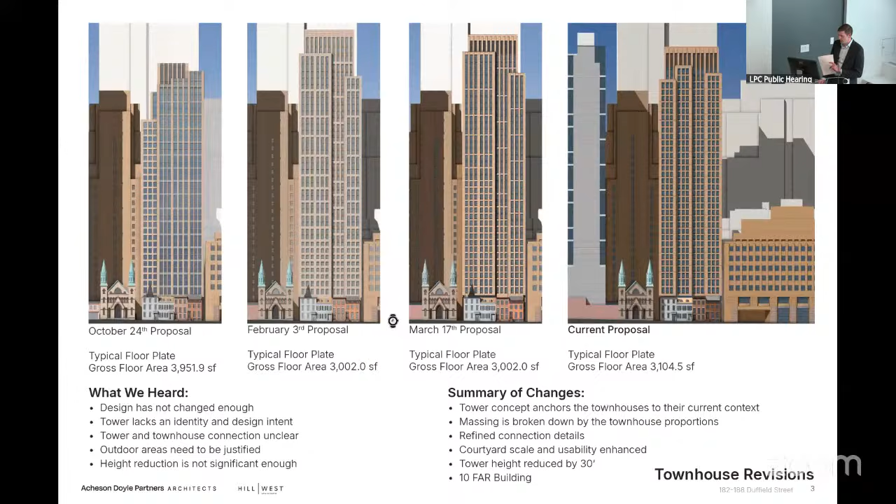We'll show you that. Overall, the height of the building has been reduced by 30 feet. And just to reiterate, this is a 10 FAR building, where one of the previous iterations was a 12 FAR building.

Okay, so design narrative. We want to take you back to these houses and what they mean and how they came to this site. These are the 4 townhouses at their original location on Johnson Street.

They represent middle-class residential architecture in downtown Brooklyn. Downtown Brooklyn has mansions in Brooklyn Heights, not too far away. There was workers' housing in the Brooklyn Navy Yard, not too far away. But these buildings represent middle-class residential architecture specifically, and that is why they were preserved and became individual landmarks. When they were built here, they were part of a group of buildings that were primarily 3 stories tall. That was their context. They were very much in context with their surroundings.

They were moved in 1990 to make way for the Metrotech development, and they went to a very different context. The buildings you see on the right-hand side and in the back were there in 1990 when these buildings were moved. So there were tall masonry buildings to the right-hand side and to the rear of these buildings from day one when they were moved to this site. They were put on modern foundations, so the townhouses exist above grade, but below grade is a modern foundation. This is the context they were put in when they became individual landmarks in 2001.

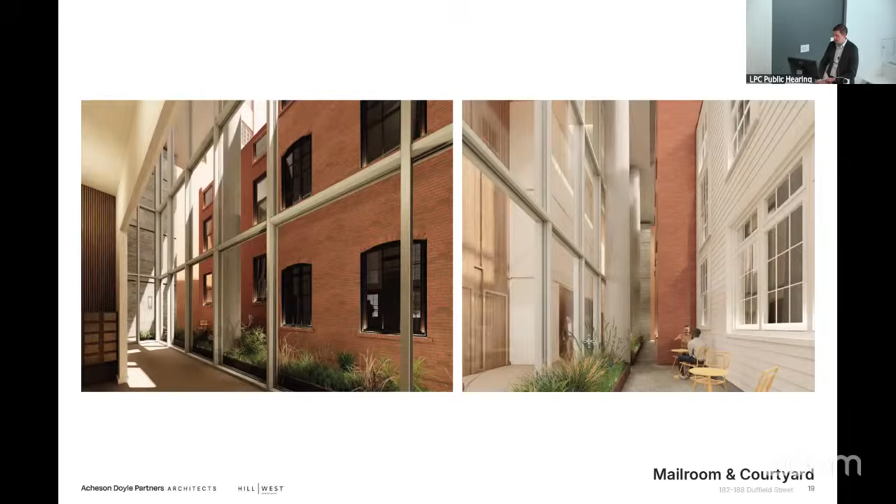This is the courtyard turning the corner and going into the rear yard. This is also our service entry, so the space will be used both for service and for recreation. And then the rear yard of the building is landscaped, and that connection between the courtyard and the rear yard makes it a much more usable, functional space.

Okay. So the townhouses - we looked at them again and how they connect to the new tower design.

And when they were moved to this site, they all have something slightly different to them. 188 on the left used to match 186. It was originally built to be the exact same twin townhouses.

In the 1880s, it was remodeled in a Queen Anne style. It's just a nugget of information that all of these buildings have a little bit of history that are a little bit quirky in one way or another, and all tell that story of residential architecture in downtown Brooklyn.

As you go down the row, 184 has a double parlor, which is a unique configuration. And 182 on the far right-hand side is a Greek Revival, very charming townhouse with small windows at the top.

The interesting thing about these buildings is they all have a history to tell, but as a composition, they're roughly the same width as you walk down the block, but they present themselves as 3 stories and 2 stories and 3 stories and 2 stories. And we feel that variation really gives the composition of these townhouses interest, and it's something that we wanted to incorporate into the new building design.

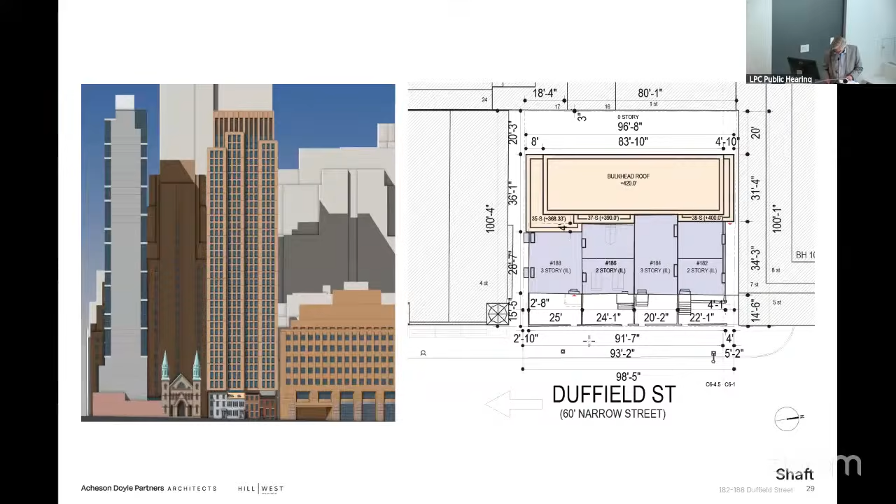Here you see how this compares to the prior iteration. The three-story packaging on the southernmost bay wraps the corner. It is clearly visible, yet subtle. The elimination of the multi-story windows makes this a gentler, more sophisticated architecture with less vertical emphasis. Note how the townhouses clearly stand in front. They hold the streetscape while the tower acts as a backdrop, reminiscent of the existing lot line walls that presently surround the site.

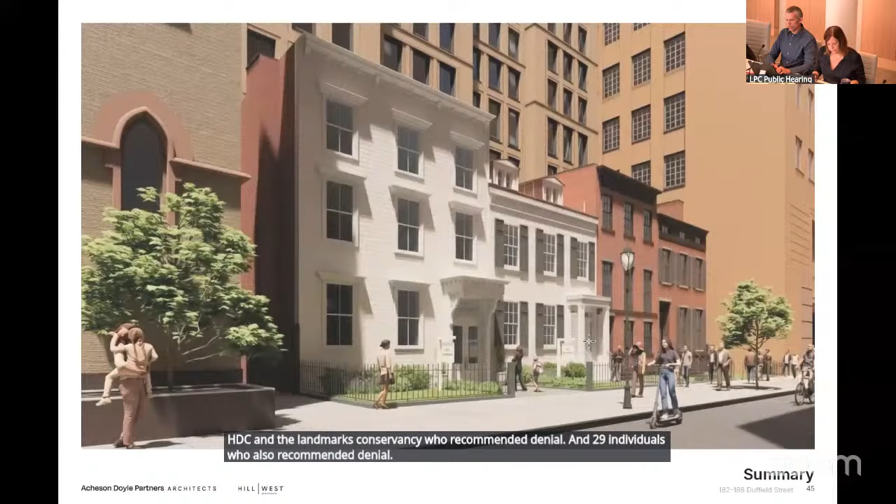So, commissioners, before we start the discussion, I want to say a few words. This is a proposal that raises a lot of unique issues. In 1990, as part of the MetroTech Urban Renewal Plan, these 4 buildings were moved to their current location and went from having a residential context to a non-residential context. The designation report describes them as examples of middle-class housing, but today they are in a very different context amidst the large commercial buildings of the MetroTech development and new residential towers, and to the rear is the individual landmark 1930s skyscraper.

That history of being moved and the resulting atypical siting and context potentially allows for a different approach here than at other sites. In this proposal, 3 of the buildings are preserved in their entirety, and 1 is being rebuilt behind the front and side facades and incorporated into the tower behind, so the issue here is primarily related to the proposed tower in the rear. As we know, there's not one approach to appropriateness — there are a range of designs that could be appropriate. I believe the key issues are the proximity of the new building to the landmark, the volumetric relationship to the landmark and the site, and the aesthetic connection of the lower portion of the building and how that is experienced in connection with the landmark. I think our approach to cantilevers is analogous to this situation. The question is, what do you see in connection with the designated property?

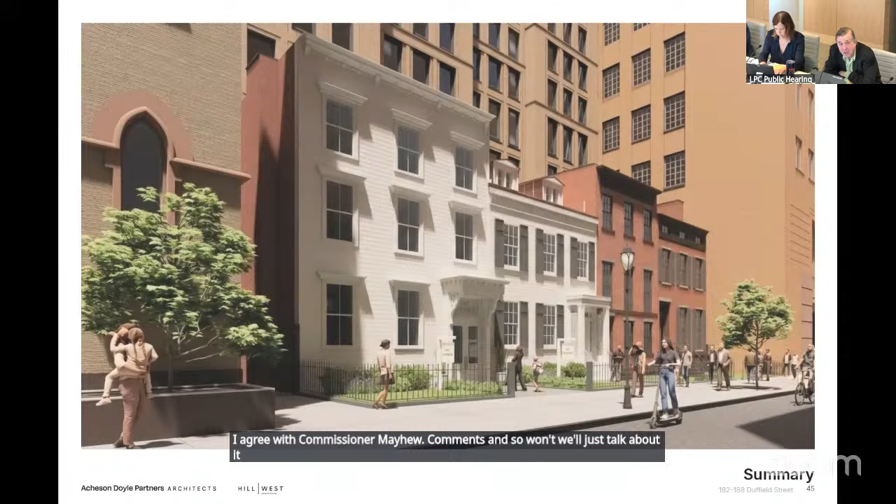Well, I agree with Commissioner Mayhew's comments, so I'll just talk about a few things. This is always, because of the relocated buildings, been a very strange location, where you always had a tall building as a backdrop. So the question is, with the change, is the backdrop going to really affect the historic buildings and how we perceive them? And I think in general, no, I think the changes in the facade have definitely improved it.

I think the creation of a courtyard or alley behind three of the buildings is significantly better. And then the fourth building being incorporated into the lobby is then perceived within the lobby without the connector piece, which I also think is better.

My one comment working with staff is, I realize you need the fire rated glass, but anything that can be done to reduce the frame, looking at potentially a different color instead of, I think it's silver now, or if there are any manufacturers who can make a smaller frame. But I realize given the size of it, you need that, and you probably need a fairly beefy structure to make it work. But again, I can find this appropriate, and I agree with Commissioner Mayhew.

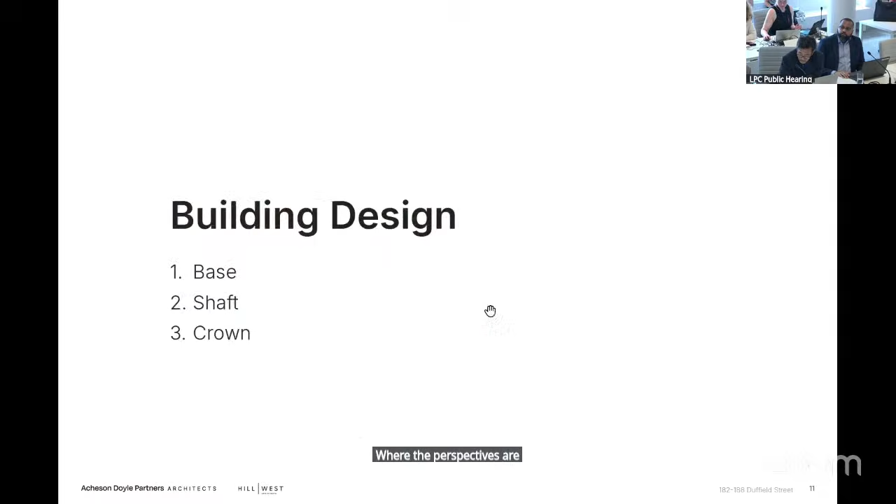There's a way that they could have taken the lobby. If you could go back, can we put the image of the section? Page 12, perhaps. Can we change the image? Go back one, where the perspectives are. Go back, so this is what we're going to see.

So there's a wall that's but three stories high on a space that's 10 feet. It'd be very exciting. I can imagine that, but I can also imagine a way that the lobby and that space could, for the tenants, for the people living there, be a really exciting kind of thing, instead of having this vertical wall. The wall could be shifting slightly so that you have a feeling that they're all part of one, not demarked by a wall. And I think if that was to happen, if that was the play of that, it's not an alleyway of blocks, I could feel more comfortable about it.

Okay, thank you, Commissioner.

Commissioner Chu, you commented that it was important that the historic houses retain their low-rise sense of scale at street level and that they were being maintained. You thought the new buildings set behind the houses felt like a backdrop along with the surrounding context, but you had a number of design comments on the tower and thought it lacked identity, and wanted to see more about how the scale of the tower related to the larger surroundings.

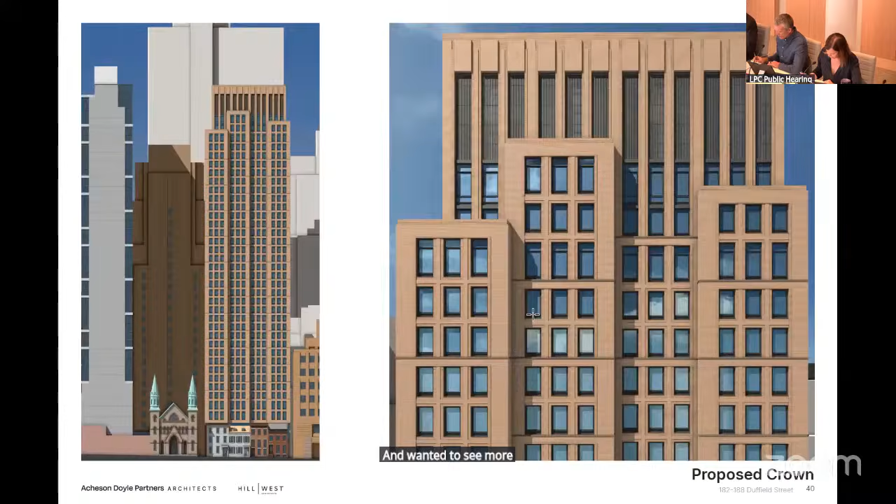Okay, thank you. I think that a lot of the discussion that has been had by my fellow commissioners is very, I feel, consistent in my reading of this proposal with this discussion.

As I look at it and I assess this proposal, it's really about its relation to the designated landmark and to some extent the context, but first about the houses themselves. I do appreciate the many revisions that have brought back essentially what was just a facade to an entire house structure and volume, and in fact the floor plates for 182, 184, and 186 are retained, as well as the structure and facades. So in terms of the amount of fabric that is being kept in the current proposal, I'm very much in favor of it.

I also will echo Commissioner Master's comment about the relationship to the streetscape. And when I look at this, I'm trying to gauge the change in effect to the landmark houses and the experience one has as you walk down Duffield Street and see these houses in their context. I think it was the right decision to not move them forward, to keep that space in front of the houses to the street and have the sidewalk more of a gracious setback for the houses. To that extent, I also looked at the images that were provided on Duffield, which I hadn't seen before, which are very helpful to look at.

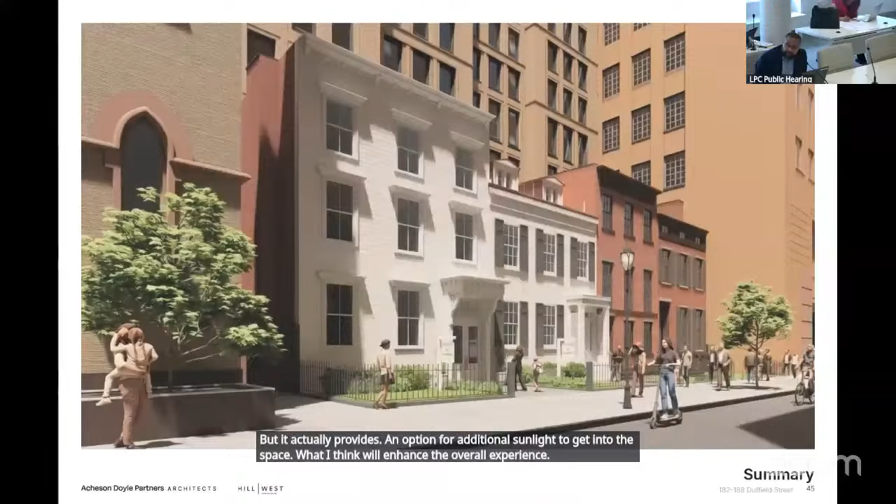As for the tower, I'm fine with a tower in that location. As I already stated, if you look at the surrounding area, you can already see the assortment of vertical structures in the area. And as was also pointed out, some of these structures were present before the moving of these landmarks.

The landmarks themselves have gone through an enormous amount of change. And because of that, I believe what is being proposed is not too intrusive to the existing landmarks. I'm glad to see that the landmarks will be able to be revived and gain as much luster as they possibly can. I'm saying this because the site itself is very difficult, and the position the landmarks were placed in makes it a very difficult proposition no matter what you do. So again, I'd like to thank the applicant for their tenacity in actually trying to bring a plausible solution.

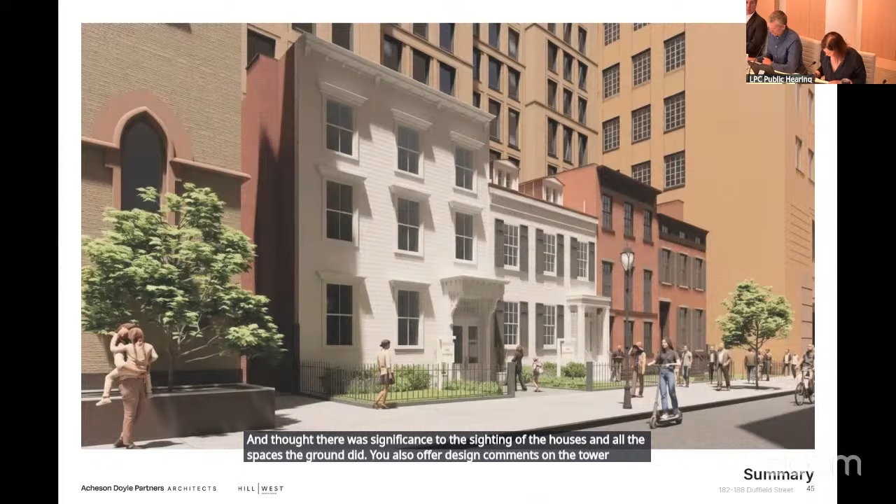Last time you stated that you were back to being troubled by the concept of having a new building in the rear yard of the individual landmark houses, and thought there was significance to the siting of the houses and all the spaces around it. You also offered design comments on the tower design, the sheer walls at the base, and the lobby courtyard. Thank you.

I guess I remain in that same situation. I think that the project as shown is an improvement, and I think it achieved what it sets out to achieve and is successful given the parameters they have set for themselves. And I understand Drew's argument and hear it. So I don't really feel that the project as presented is unsuccessful in achieving its goals.

I'm more concerned about the conceptual underpinnings of the application. I totally accept Frank's reading of the uniqueness of the site, which Drew echoed, or vice versa.

What it implies is that because the buildings were relocated, their status is somehow debased. They were original and historic and legitimate and real, and because they're moved, that Williamsburgization of them, or Disneyfication of them, into an assembled ersatz collection gives them perhaps less significance, value than they would have had they been located in their original location.

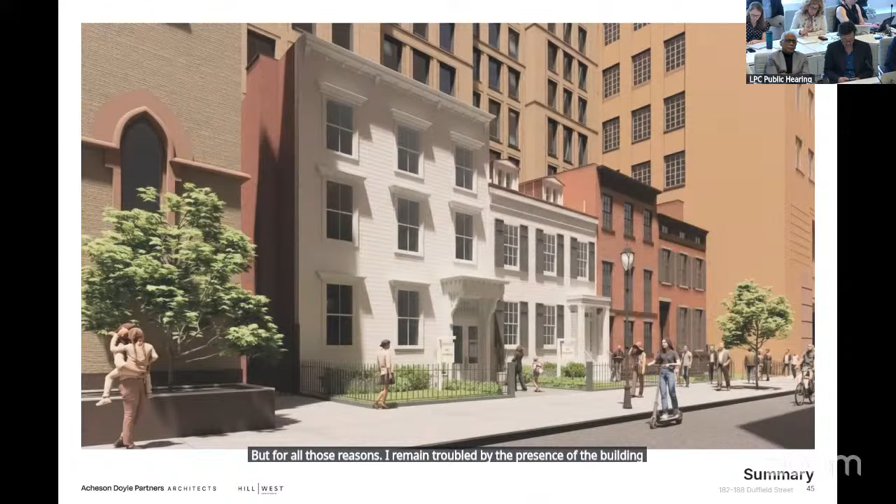I think one thing that I would say is that this project finds itself at the nexus of two different regulatory systems, landmarks and zoning. I think if we could wave a wand and disregard zoning, this building would be much more appropriate if it were a lot line building pushed to the back, as the Belltel Lofts is a lot line building pushed to the back. It would create more space for our building, give a real rear yard to our buildings, and would be a much more contextual approach to the neighborhood's development in that immediate context.

But that's just not—I don't have that wand. We don't have that wand to wave. So I am troubled by this, and as we saw, the applicant showed a precedent; this will become a precedent for other projects. So I think that it argues for bigger policy issues.

I mean, I think one way you could solve the issue of debased quality, or allowing for more flexibility, would be to have grades or some kind of indication within a designation that this is less significant for this reason, and therefore less deserving of protection. But that's not how it works today. So I can't support it as is.

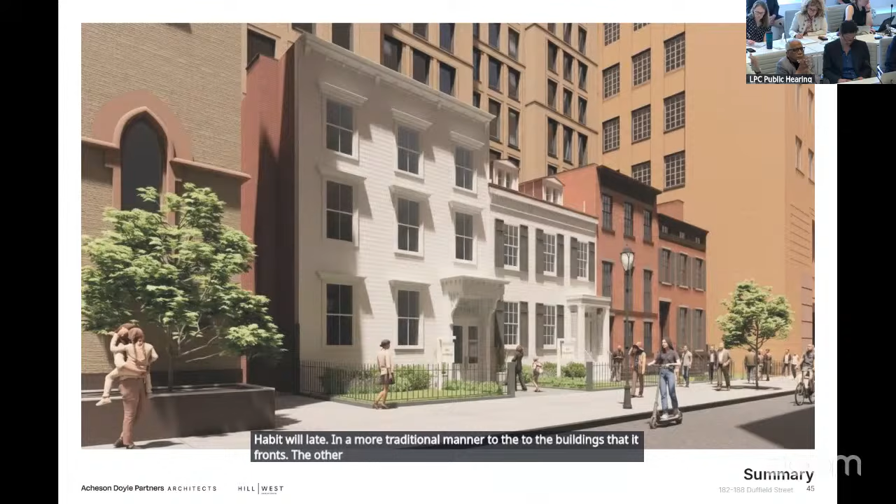The other issue is the ceiling. That cantilever is rather perfunctorily detailed. It's a concrete slab that, looking up at it, it's not a courtyard. It's not even an alley. It's got a roof. So by zoning and by experience, it's not that.

And I think there are lots of examples of overhangs that have a kind of intentional relationship with the space below, whether it's a vault or a material choice or beams. There's something kind of unconsidered, I think, about that transition from the vertical plane to the horizontal plane as a three-dimensional experience at the back of those buildings that could be improved.

Okay, thank you very much for your comments.

Okay, just one second.

Okay, I believe that we have the votes to make a motion, but that we're going to recommend that the applicant continue to work with staff on the details of the curtain wall. Commissioner Mahan, will you make that motion?

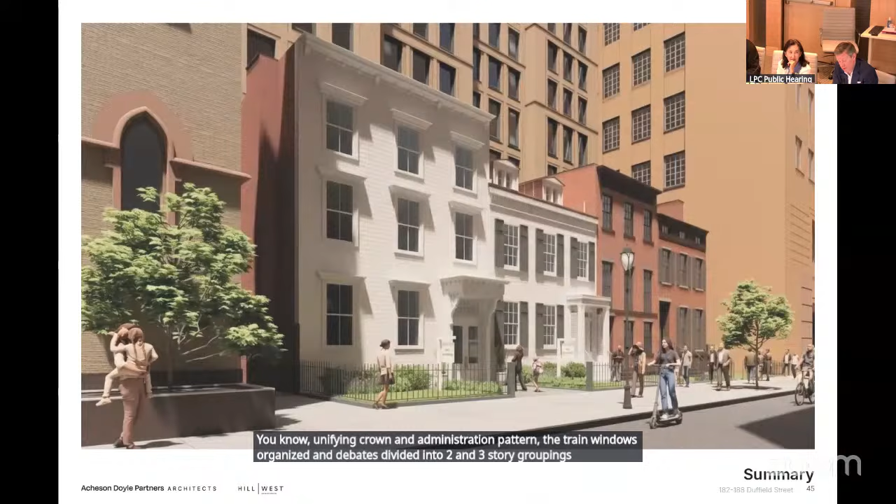That the four-part vertical massing and plane changes of the new building behind each townhouse, culminating in a unifying crown and a fenestration pattern featuring windows organized into bays divided into 2- and 3-story groupings by horizontal cast stone bands, will relate well to the facade widths, heights, and fenestration of the individual townhouses below.

That the incorporation of short recessed louvers with a dark gray finish at the bottom of each window will facilitate integration of energy-efficient mechanical systems, will match the finish of the windows, and will be partially concealed from view by the brick sills and cast stone banding, thereby minimizing their appearance from the public thoroughfare.

That their realignment and elimination of select floor levels and rear facade reconstruction at 188 will not affect the exterior fenestration or be conspicuous as seen through the openings.

That the excavation and structural work will be designed and built in compliance with Department of Buildings regulations under the supervision of a licensed professional engineer to protect the buildings, and will continue to undergo enhanced engineering review, and that the proposed alterations and construction of a tower will enable this long vacant or underutilized group of buildings to be restored and transformed to a new residential use, thereby supporting the special architectural and historic character of the individual landmark.

And that the applicant will work with landmark staff to refine the details of the fire-rated glass curtain wall at the lobby of the new building.

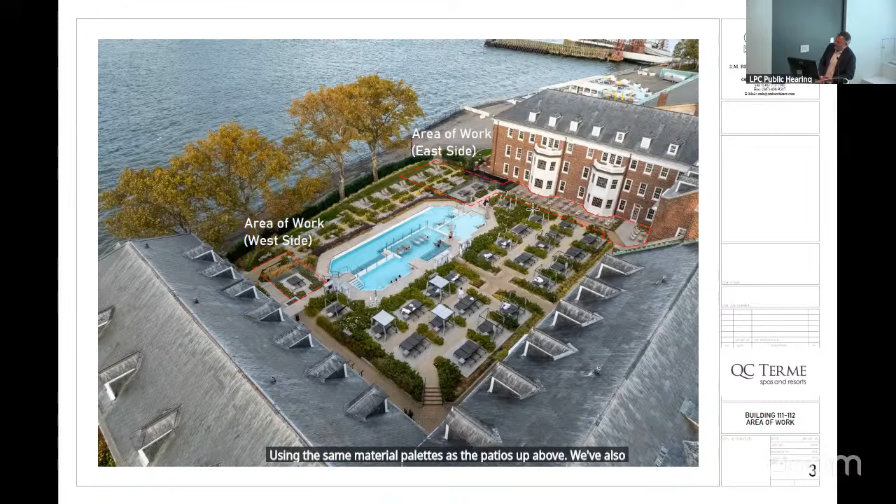In response, we are still showing the Trex decking along the side of the east building, and we've modified the proposal to introduce patios on both the east and west side, using the same material palettes as the patios above. We've also added more details on the existing conditions, since there were questions about that.

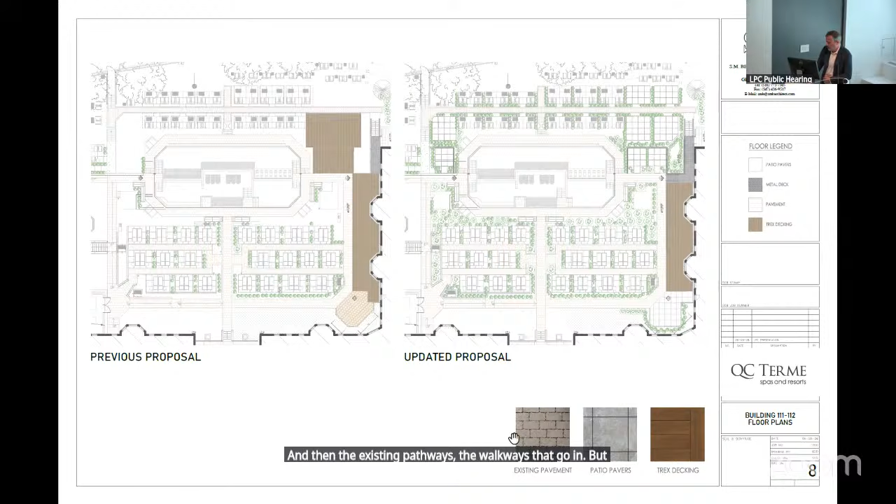Each of those has the patio underneath, so that's consistent use of materials there. The existing pathways, the walkways that go in between, are this sort of brownish brick. We're not adding any of that as part of this, but it is part of the palette. So the only new material being added in the plan here is the Trex decking along the side, which I believe the commissioners were comfortable with last time.

The upper patios, both east and west, have the glass railing. The lower patios have no railings. Again, both use the same paving material that is used throughout the complex.

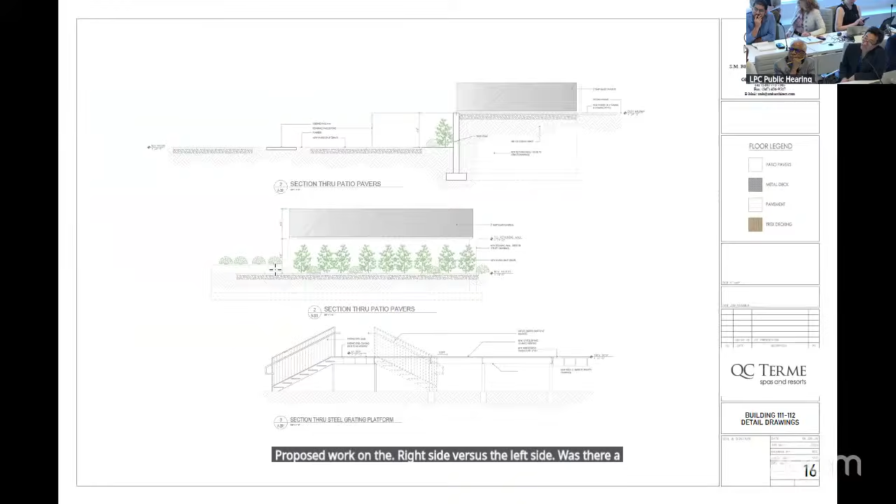Thank you. Commissioner Goldblum: Yeah, thanks. So looking at the proposed work on the right side versus the left side, was there a reason why you didn't just make it symmetrical to what's already on the one side? I mean, clearly there's an extra array of pavers and a wider balcony and a different position for the walkway. Was there any reason for that versus just making it symmetrical?

Yeah, so I think as noted, obviously this is a very symmetrical arrangement, but it's not completely symmetrical. You notice there are some differing conditions on the left side versus the right side, having to do with grade changes and the like. And we'll note that from the public walkway, which would be the area to the top over here, these platforms are largely obscured by bushes and greenery. So the symmetry that you're seeing is really not experienced from the outside, but from the inside.

Sandy, do you want to talk about rationale behind the arrangement particularly? Yeah, the overall site is symmetrical in the fact that the pool sits in the center. We were looking for a balanced condition from the left and the right side, or the east and the west. We're also dealing with some unfortunate site conditions. Underneath, there's some tunnels, air shafts that come up on the left side that are not existent on the right side. The other condition we were dealing with is an existing pathway, sort of an egress pathway. So the intent was to give you the balance to the left and right of the pool, but there is some asymmetry to it.

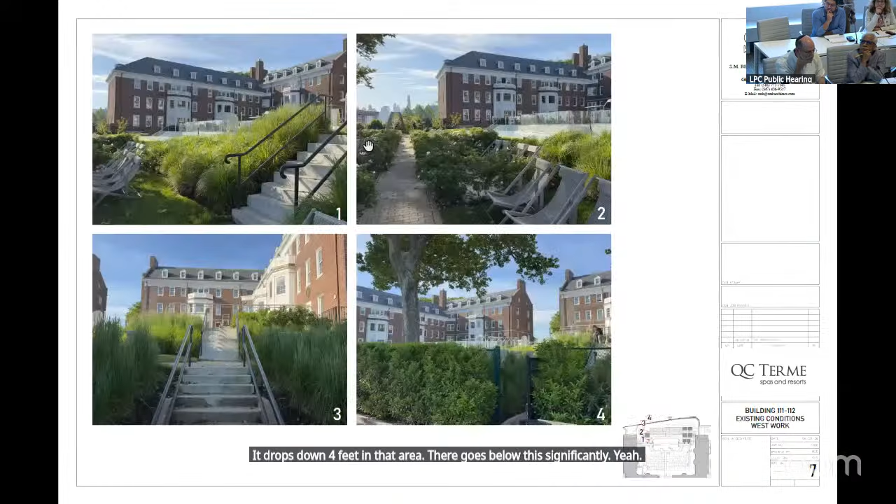There's some air intake where the bay windows are. It drops down 4 feet in that area. Grade goes below this significantly. How do I go to the section? Go the other way. So we're dealing with the grade down below, and in there are field drains, air intake, relief valves, all of the mechanical from the basement of building 111.

Okay, so that being a green zone, which would have made it more symmetrical, would have been challenged because of that. I'm not sure if I... If you look at the footprint, this desired to be a green zone because it was up against the facade, and typically all the facade had green planting up. The existing condition had the green zone, correct? Okay, I understand what you're dealing with.

Well, the technicality is that the drop is 4 feet, elevation 17 to elevation 13. And the choice where we landed on the glass guardrail was consistent with the pool. The pool has also some steps, so we were going with a consistent glass detail.

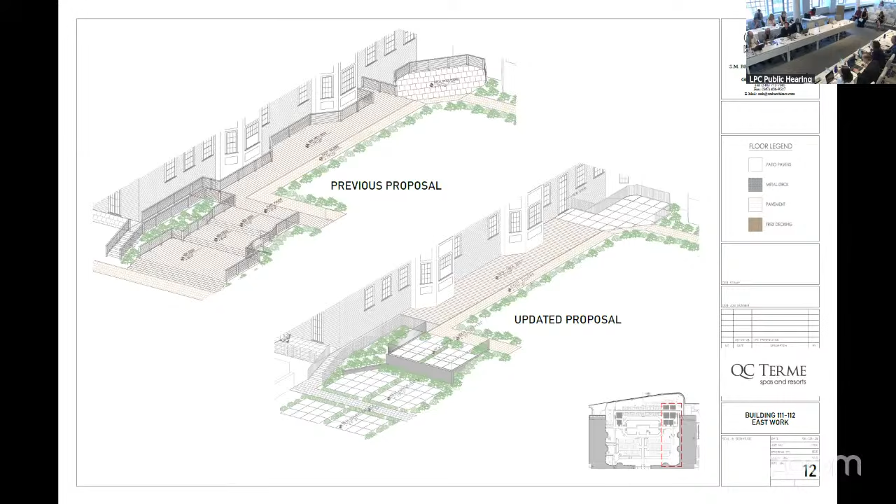Okay. Right. Point just being the asymmetrical aspect is actually really only seen because of the glass guardrail. Everything else is pretty much on the floor plan, and it's hard to perceive so much that there's a difference. Any other questions? No?

Okay, commissioners, since we last heard about this at the hearing in January, I wanted to summarize the commissioners' comments. There was a general thought that the presentation materials were lacking and unclear, but most thought the proposal was consistent with the conditions of the existing courtyard and supported the new decking and door to the side of the courtyard. Some had concerns about the work introducing asymmetry into the courtyard landscape. Now the presentation materials have been updated and clarified, and the proposal has been changed to forego the stepped wood decking at the lower courtyard for more typical pavers used throughout the existing courtyard.

And Vice Chair Master, would you start this conversation? Sure. I think the changes you made are a big improvement. I understand you can't achieve perfect symmetry, but it's a big improvement over what it was before. It's much more symmetrical. You're introducing more pavers and less decking material, which also introduces some more greenery. So I can find this appropriate.

Commissioner Ginsburg? I agree, I can find this appropriate. Find it appropriate as well. Commissioner Chu? Yes, I can find this appropriate. Commissioner Jefferson? Appropriate. Commissioner Mahan? I concur. Okay.

That's been approved. Let's move to the next item. Next item is public meeting item number 3, LPC 26-06324, an application for a certificate of appropriateness in the Borough of Manhattan, Block 1184, Lot 1, 3 Riverside Drive, the Kleeberg Residence Individual Landmark, also in the West End Collegiate Historic District Extension. This is a French Renaissance Revival style townhouse designed by CPH Gilbert and built in 1896-98. The application is to construct a rooftop addition, alter the areaway, and replace windows.

This was last presented at the public hearing of April 7th, 2026. No action was taken at that time. The applicant will present revisions to the proposal in response to your comments after we open the proceedings.

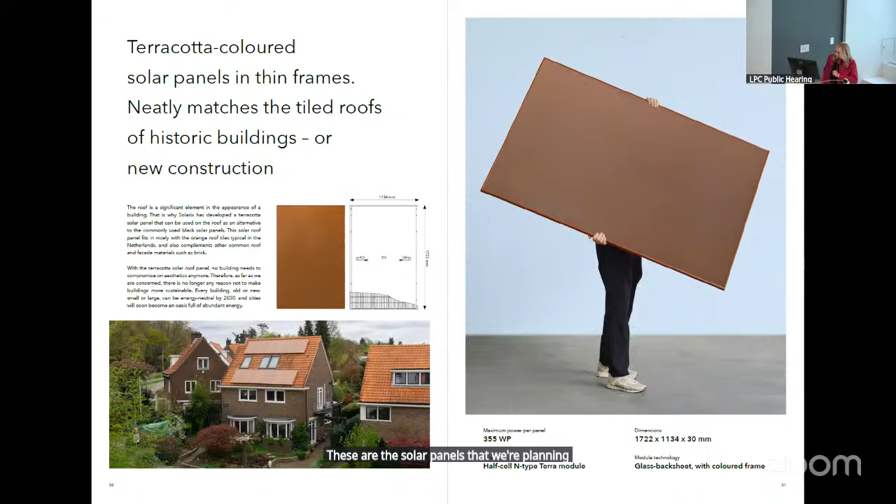We do have an attestation from the elevator company because it was discussed at the last meeting as to why this elevator needs to be at this height. We cannot use a hydraulic elevator; this is an MRL, machine roomless elevator, and this is the lowest height we can have for this elevator. There is a letter from our elevator vendor in the appendix stating as such. We worked with several elevator companies to bid the elevator, so we know this is the shortest elevator we can get that will be ADA compliant and also able to take a stretcher.

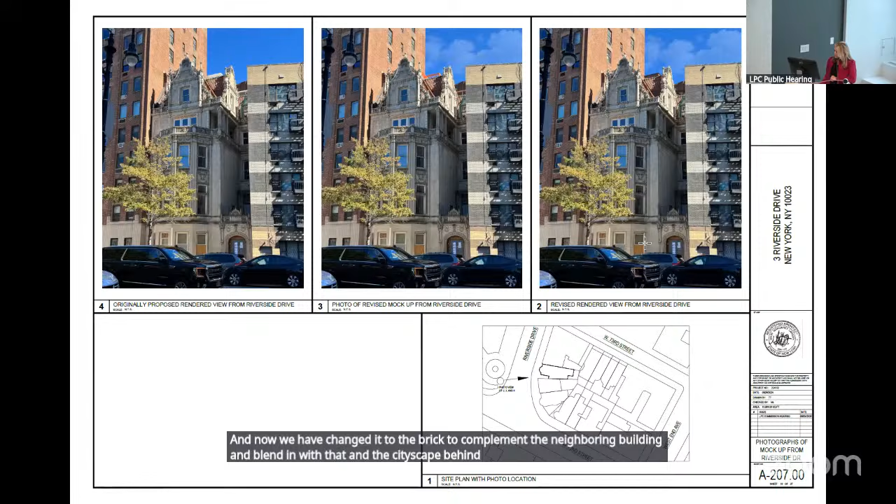This is the view from further out, as you drive up toward the West Side Highway. You can see we are trying to match the neighboring brick buildings and their copings, blending our rooftop addition with the cityscape that has developed around this building over time.

As this slide shows, we have blended, using different materials, our rooftop addition to make it more cohesive with the coloration of the building, our terracotta roof tiles, and the buildings that have grown up around us, so that our addition does blend in with the context of what has happened around this building over time.

Commissioners, are there any questions?

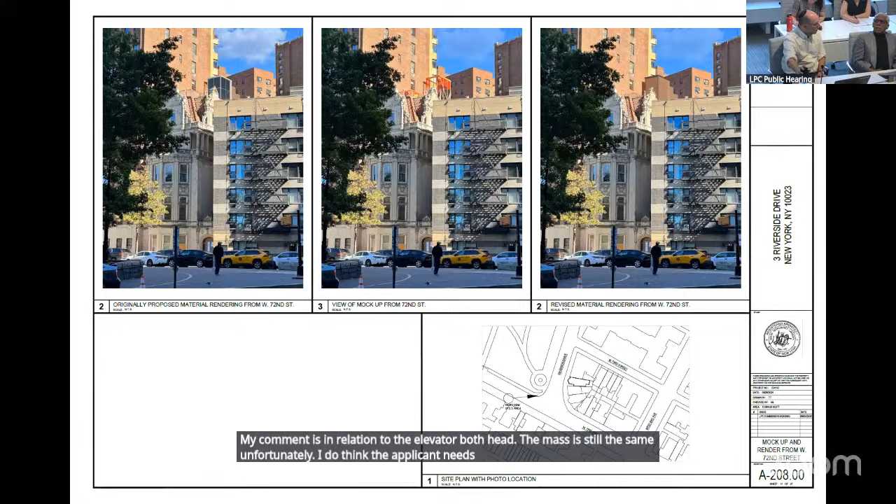Yeah, I think that there have been some improvements to this proposal. My comment is in relation to the elevator bulkhead. The mass is still the same, unfortunately. I do think the applicant needs to work with staff. The details are not here. It's brick, but these panels, are they just attached to the brick? I do think that it should be carefully detailed, even though it's a backdrop. The historic building is so well crafted. Anything that's added to this should have some level of care. So otherwise, it's appropriate. Thank you.

Commissioner Jefferson? I think they have responded affirmatively, and I think the elevator penthouse, it works, the color blends in somewhat. So I can approve that.

Thank you. Commissioner Goldblum? Thanks. Yeah, I think it's greatly improved. The areaway, great. Rear facade, curved glass, fantastic. The change in the bulkhead is an improvement. I think I kind of agree with what Stephen was saying about looking at the details of that bulkhead, though. I think that the south-facing panels are okay for me in their new color. Although I would suggest that the applicant work with staff to look at the details as Stephen had suggested, maybe they can be recessed in new construction. Maybe you could recess them in so there wouldn't be a shadow from them into the construction of the bulkhead.

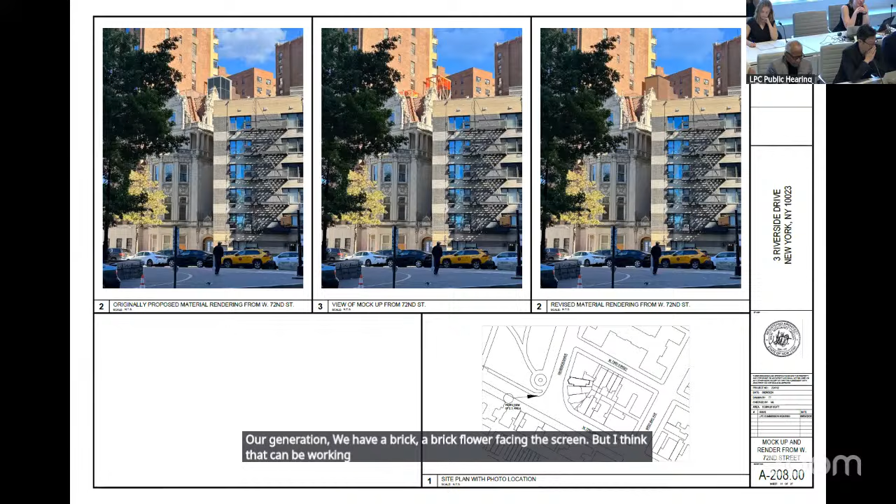Okay, thank you. Commissioner Mahan? I generally agree with Commissioner Goldblum. I think there's a lot of improvements here. I think the changing of the coloration of the bulkhead to match the sort of context buildings is a significant improvement. I do not think that the solar panels will blend as well as illustrated in the rendering here. I think they'll look quite distinct and discordant with the context. I think the ones facing west should definitely be removed, and the ones facing south should be considered together with staff. Perhaps recessing them could be a compromise position as proposed by Commissioner Goldblum.

Vice Chair Master? Yeah, I think that this is a big improvement. I think they can work on the details with staff. I'm happy for them to consider the suggestion that Commissioner Goldblum proposed, but I'm also okay with the solar panels. But perhaps they can work with staff on that.

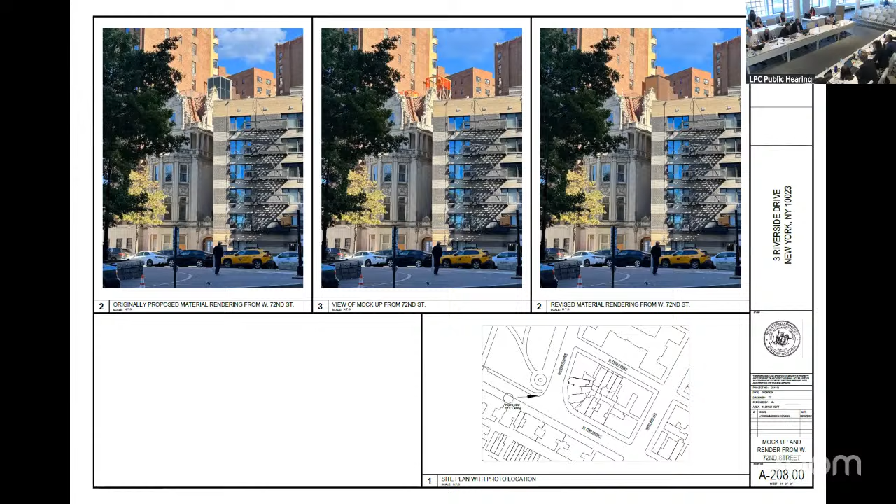Okay, I think we have a vote with a recommendation that the applicant work with staff to explore the details of the elevator bulkhead and the placement and detailing of the solar panels. Oh, and Commissioner Ginsburg, if you could make the motion, sorry. Figured that, but thank you.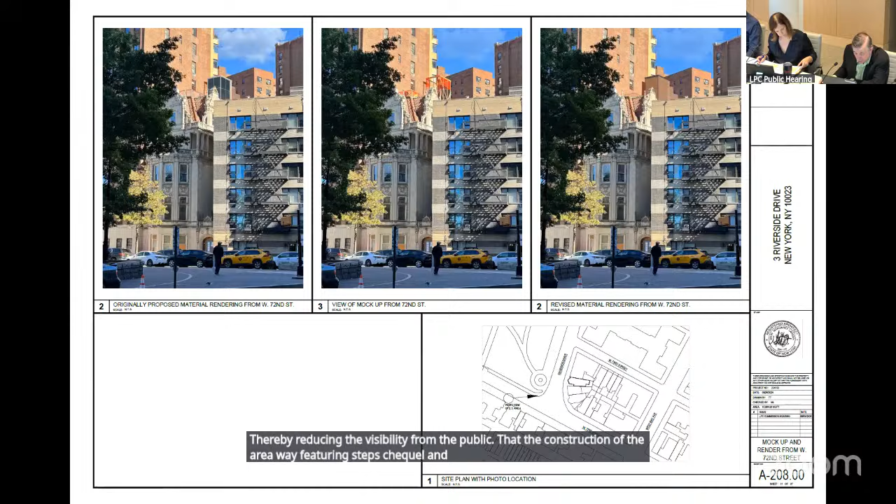That the proposed material and finish of the rooftop accretion, consisting of red brick cladding at the elevator bulkhead, reddish-brown solar panels, terracotta colored HVAC screening, and brown pergola, will visually blend into the red brick masonry of the secondary facade of the taller building in the background. That the proposed metal picket railing at the roof will be simple in design, neutral in finish, and will be set back from the parapet, thereby reducing the visibility from the public thoroughfare. That the construction of the areaway, featuring steps, cheek wall, and newel posts with a larger footprint than the missing original areaway, will return the ground floor of the Riverside Drive facade closer to its historic condition, and the design of the areaway and use of limestone will be in keeping with the character and materiality of the original with variations to accommodate modern code and accessibility. Working with staff, the details of the elevator bulkhead and locations of the solar panels should be refined.

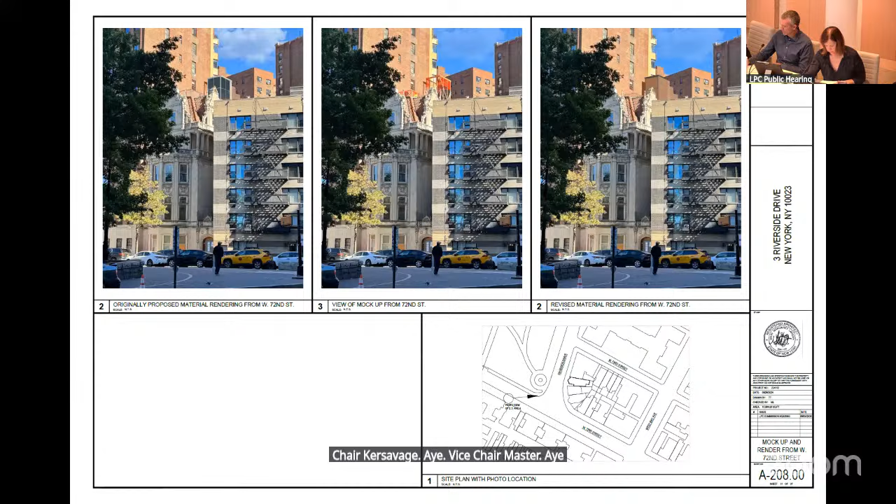Let's move to the next item. Next item is public meeting item number 4, LPC 26-05940, an application for a certificate of appropriateness in the Borough of Manhattan, Block 1210, Lot 152, 144 West 80th Street in the Upper West Side, Central Park West Historic District. This is a Renaissance Revival style row house designed by Gilbert A. Schellinger and built in 1890 to 91. The application is to construct rear yard and rooftop additions. This was last presented at the public hearing of March 10th, 2026. No action was taken at that time. The staff will present revisions to the proposal after we open the proceedings.

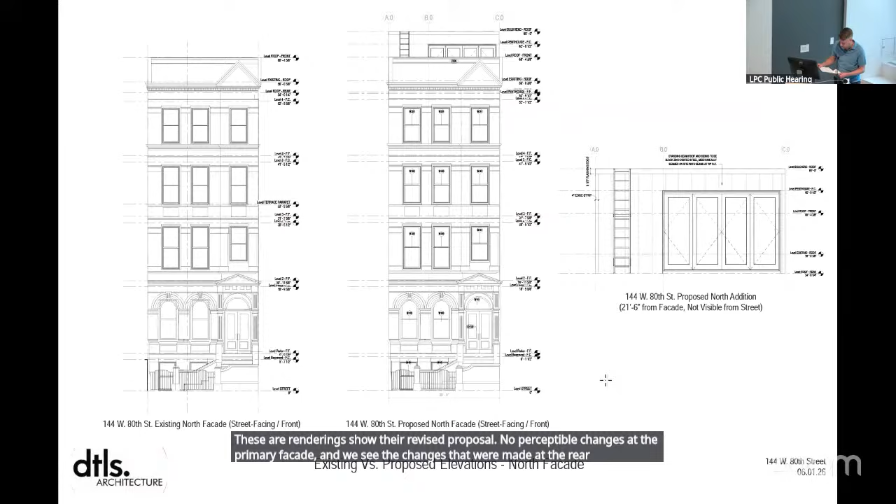These renderings show the revised proposal, with no perceptible changes at the primary facade, and we see the changes made at the rear. Elevations showing the primary and the rear with those changes that we discussed. At the retained top floor, the stucco cladding will be removed to expose the underlying brickwork and stone lintels at the masonry openings. Note also that the brick detail will be restored at the cornice to match the conditions at the row, as we see in comparison with the neighboring house at 142 West 80th Street.

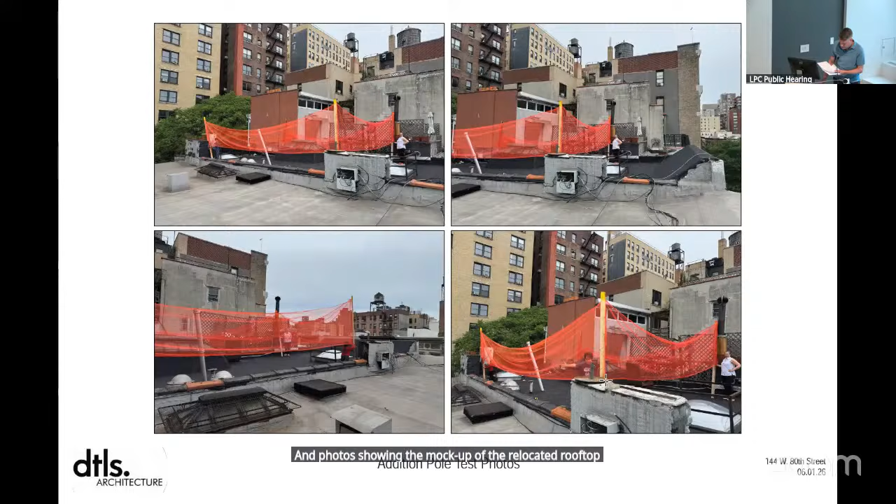Here we see the revised proposal in section, and as noted, although the rooftop addition is shifted toward the primary facade, it will remain a non-visible presence. Here we see the changes in plan, and photos showing the mock-up of the relocated rooftop addition, which is not visible from the street. Now Mark Barrick, the architect, is here to answer any questions you may have about the proposal.

Hey, commissioners, are there any questions? Okay, not seeing any. Oh, sorry, Commissioner Chu. Or for us, the last time this came, did we have a discussion about the block, the L tails on these, or I can't recall what our discussion was.

I think we could go to the block plan. I would say we pretty much always have discussions on the block plan, and this is one of those blocks where there is some consistency, but there's also some Ls that have been removed and replaced with full-width additions. I think that the commission has approved on at least one occasion, if not in this particular group, then elsewhere along the row. Maybe, Brian, do you have any more information on that, or is this actually the first addition that would have a full width rear addition? Go to the mic. The original Ls are in place at the other buildings. This would be the first one to be a full width.

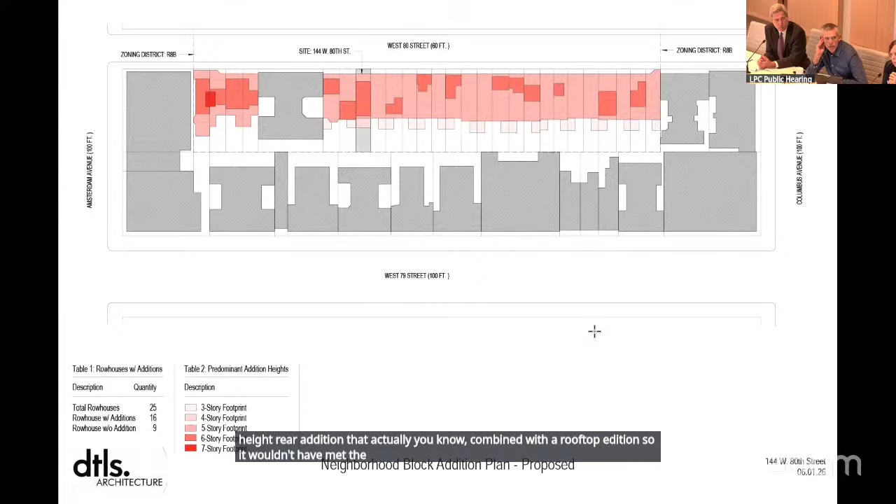I'm just going to make one note about that. The commission does discuss this frequently, but as I've raised at other discussions about the block plans and about the rear Ls, those are not considered significant features in themselves by our rules, which means at staff level, an L could be removed with a staff permit. Depending on the height and depth of the addition proposed to replace it, that could potentially also be reviewed at staff level. In this case, the applicant came in proposing a full height rear addition that, combined with a rooftop addition, wouldn't have met the rules, but I'm just pointing that out for the purposes of discussing the block plan. Thank you.

Okay, I would just note that we did not receive any additional testimony since the public hearing on this item. Commissioner Ekwembe, could you start the discussion, please?

I believe that the applicant took our commentary and made the appropriate moves. As asked, the top floor was lowered to reveal the existing building. The rooftop addition was pushed away from the rear facade, and even though it was moved forward, it's still not visible from the street view. I believe we were pretty much okay with some other items, more or less the detail and arrangement of the facade itself. So overall, I can find it appropriate.

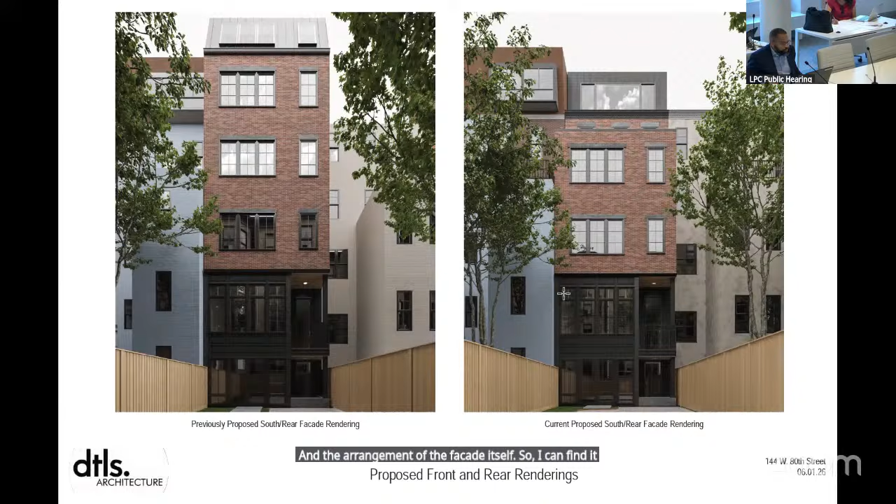Commissioner Chu: I think I can find this proposal appropriate. The only question I have—maybe I had stepped out and didn't see it—but I'm not finding a dimension of the setback from the rear for the rooftop addition. I just want to make sure the substantial setback will not be confused with the top floor. My understanding is that it's 3 feet, which is the typical standard you all look for, and also what the staff level rules require. It's just that I don't see a dimension here. That's my only comment. Otherwise, yes, appropriate.

Commissioner Jefferson: I agree. There was a time, long, long ago, when I thought that a template for extending and modifying townhouses could be developed that would accommodate scale in some visual manner. But I think that ship has sailed. I think we have a template, and this is it, and I think we've got to stick with it.

Commissioner Mahan: I think this looks good. I appreciate the revisions that the applicant has made to closer conformance with the commission standards. Materials and detailing are handsome, and I can find this appropriate.

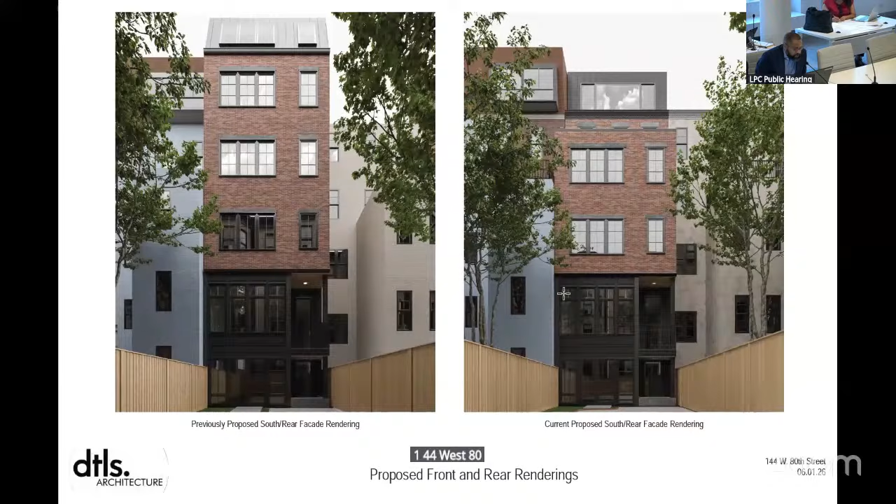Yes. In the matter of LPC 26-05940, 144 West 80th Street, Upper West Side, Central Park West Historic District. A Renaissance Revival style row house designed by Gilbert A. Schellinger and built in 1890-91. This application is to construct rear yard and rooftop additions.

I recommend approval, finding that the proposed work will not damage or eliminate any significant architectural features, that the proposed work will not be visible from public thoroughfares, that the proposed rooftop addition will be set back from the front and rear facades, and the proposed rear yard addition will not rise to the full height of the building, thereby helping to maintain a sense of the building's original massing. That the rear yard addition will not project farther into the rear yard than the existing rear L, and therefore will not diminish the block's central green space.

That the proposed light well and setback facades at the lower floors of the rear yard addition will recall the openness of partial width rear Ls at the other houses in this row. That the removal of stucco cladding to expose the underlying brickwork and stone lintels, and the recreation of the corbelled brick at the top floor of the rear facade, will bring this portion of the facade closer to its historic appearance. That the materiality and finishes of the proposed rear yard and rooftop addition, featuring punched openings with multi-light and mullion doors and windows, red brick and black painted wood cladding, bluestone lintels, and black finished standing seam metal cladding and roofing, will be in keeping with the materials found at other rear yard and rooftop additions at buildings of similar age and type within the historic district, and that the proposed work will not detract from the special architectural and historic character of the building or the Upper West Side Central Park West Historic District.

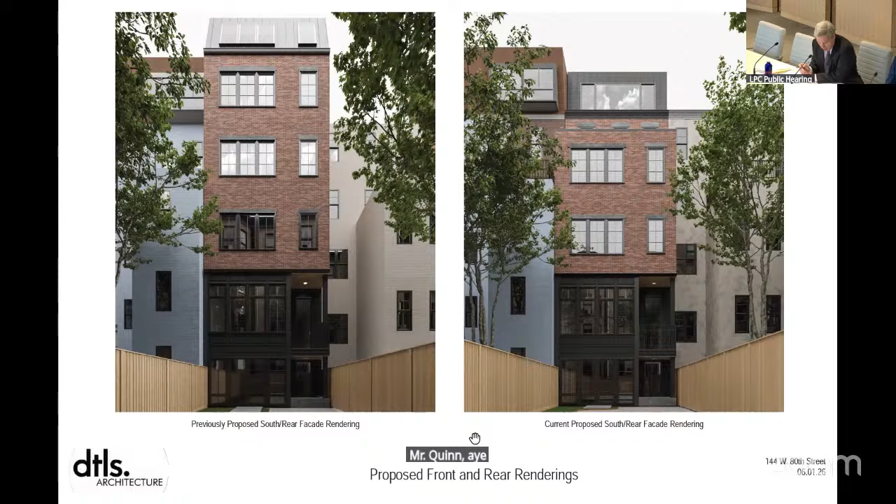Thank you very much. Let's move to the next item. We'll also move to our public hearing agenda, starting with public hearing item number 1, LPC 25-10118, an application for a certificate of appropriateness in the Borough of Queens, Block 182, Lot 110, 4012 44th Street in the Sunnyside Gardens Historic District. This is a colonial revival Art Deco style row house designed by Clarence Stein and Henry Wright and built in 1927, and the application is to install a skylight.

Good morning, Commissioners. Richard Lowry, LPC staff. I will present the proposal, and the architect Brian O'Connor is here to answer any questions.

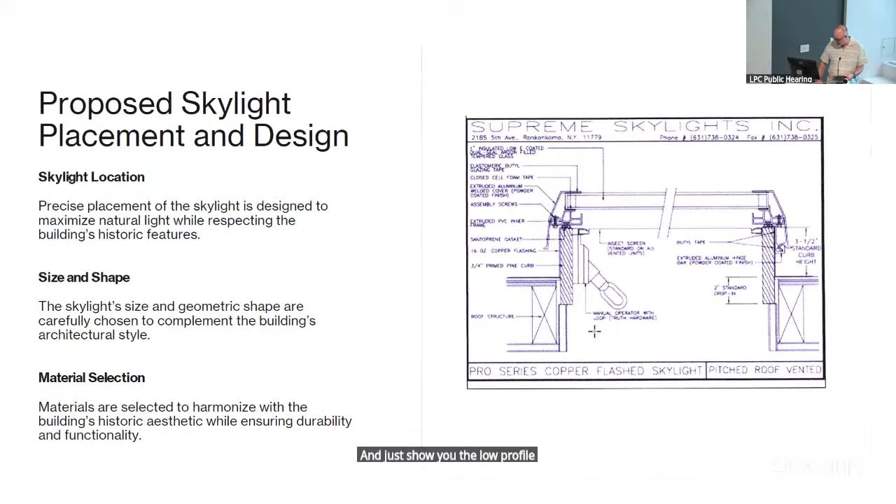Visibility, again from 43rd Street, is from various points along through that break in the building wall. This is really the highest visibility portion, here through the foliage. This was taken in winter, which would probably be the most visible time. But that's the extent of the visibility from 43rd Street.

Okay, so thank you, Commissioners. Brian's here to answer any questions if you have any.

Do we have any questions, Commissioners? Commissioner Chu: just to be clear, the skylight is facing the internal courtyard — it's hard to tell where it is on the house, in the picture. That's correct, it's on the rear slope of the roof, inside the court. So it's only visible through that break, across the central green space at the rear facade and rear slope. Thank you.

Any other questions? Commissioners, I just want to note that we've seen a few of these in Sunnyside Gardens and elsewhere. Really, the only reason this is before you today is because the skylight would be installed through the slate roof of these houses, and in general we consider slate roofing to be significant material. However, you've approved this on many occasions, and this will be part of an upcoming rules amendment package, which will have an entirely new section for rooftop skylights, allowing modest installations through slate roofing, particularly on rear-facing slopes.

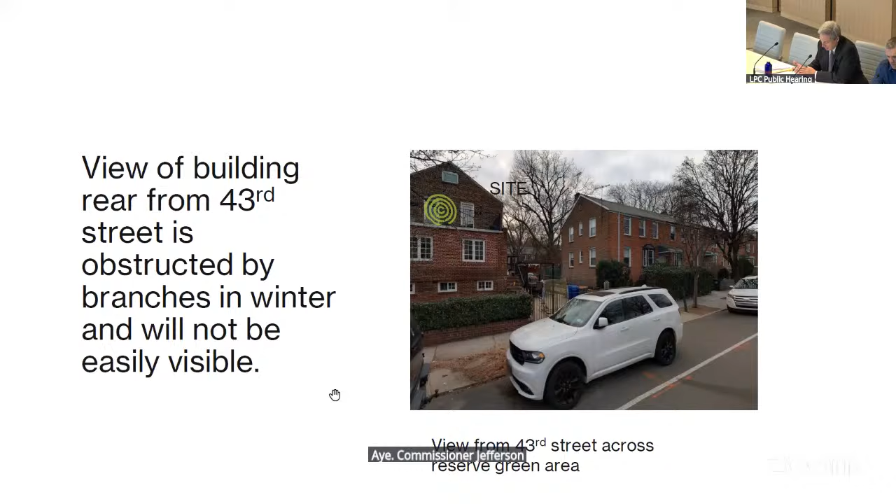Thank you very much. Let's move to our next item. Next item is public hearing item number 2, LPC 26-09457. An application for a certificate of appropriateness in the Borough of Brooklyn, Block 2102, Lot 3, 265 Cumberland Street in the Fort Greene Historic District.

This is a residential building built in 2003, and the application is to reclad and alter the facade and construct a rooftop addition.

My name is Richard Boshin. I'm the architect for this project. This is an unusual project for landmarks because the building is only about 22 years old and was built under landmarks, with landmarks approval.

This is actually a photograph of the previous building that was there when the district was designated. It was a wood frame building that came down, I'm not sure when, but the new one was built in 2002, 3, and 4.

This is a picture of the existing front facade from Cumberland Street. One of the things the commission talked about when they approved this was that it had the massing of a carriage house, which is one of the things that appealed to the current owners, and one of the things we're trying to make more of and improve on.

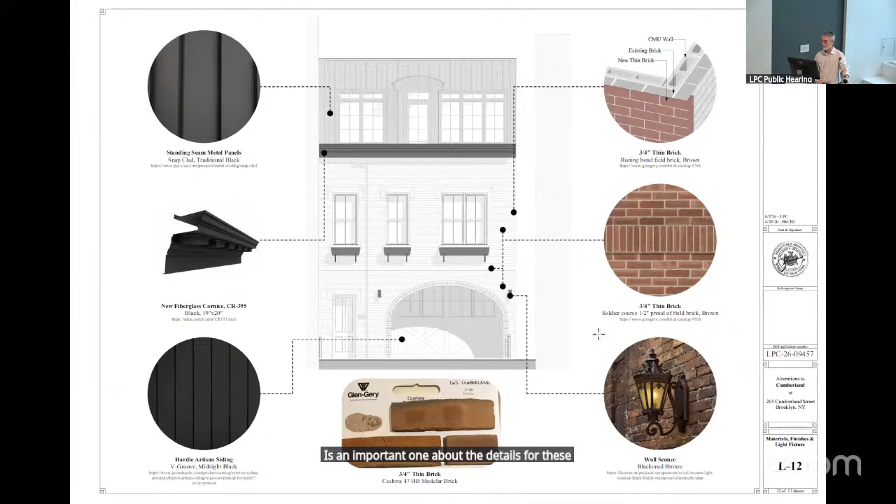So these are some of the materials. We're adding a bigger cornice. The existing facade has sort of a cornice, but it's just stepped out bricks and looks very modern, so this is something a little more traditional we're putting on there. On the upper right is an important detail for the thin bricks we're using on the front. It's important that they wrap around the details, the openings at the doors and windows, and on the side, so that it doesn't look like wallpaper bricks. And on the bottom in the middle is an example of the bricks.

These are details for the windows, mostly on the front. And actually in the upper left, you can see the new cornice wrapping over the existing one. The idea is to keep that if anybody would ever want to put it back again. These are window and door details, and these are details from the mansard on the front. And this is photographs of a mock-up that's still there.

With the thin brick, are you just gluing it to the CMU, or do you have some system for installing it? The intention at the moment is to glue it - it's not CMU, it's brick - we're going to leave the brick facade that's there and add a 3/4 inch brick on top of it. The idea is to glue to that. That detail could be really tricky because with detailed thin brick, there are often panelized systems that allow for drainage and also for proper mechanical support as well as gluing.

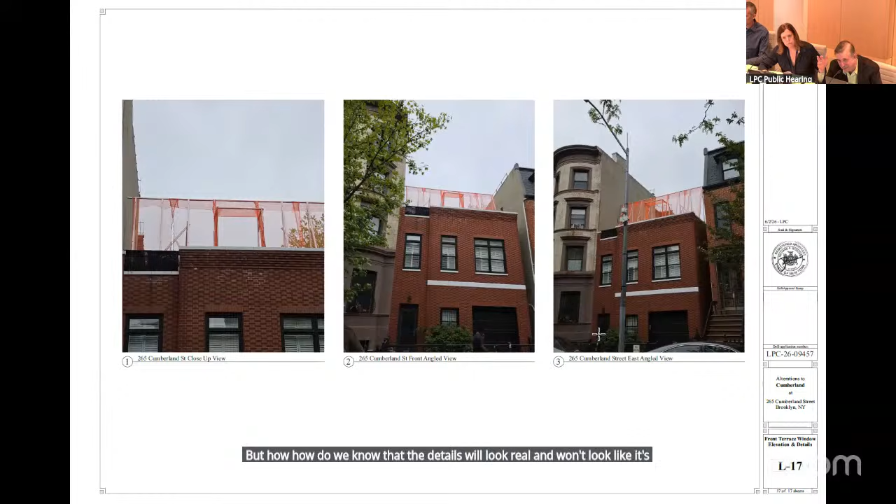Well, part of the reason is the use of L-shaped bricks there. That makes the outside brick look like a 4-inch thick brick. And the wall is going to be a full foot thick, right? There'll be the ends of the thin bricks attached to that too. So everything you see from standing under the arch will be the new brick.

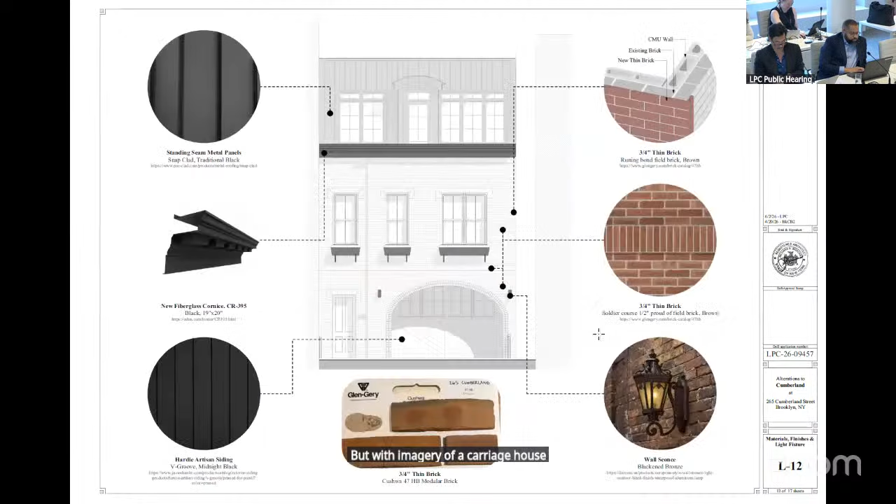So this is a new building, and when you designed the original new building, you had a carriage house - designed an image of a carriage house, and it wasn't actually a carriage house. Now you're keeping the image of the carriage house while designing a residence. Why are you doing that? Well, the original building was a residence, a single-family residence. But with the imagery of a carriage house, right? Yes, it had a garage.

Let me go back a little bit - this is probably the best view. On the left is the way it is now, that's a garage door, and there is a garage in there. What we're doing is building an arch that's bigger, intended to give the imagery of a carriage house. So you're keeping it as a garage - cars are actually going to go in there? No, the dark wall you see behind the arch is actually a fixed wall.

The reason it steps back is because we have a parking pad out in front. It's all an image - it's not really real. It steps back, and the reason for that is to get enough space for a car to fit there. We need an 8x18 space for a car. I see, so that's a parking pad, and most of the garage space is going to become living space.

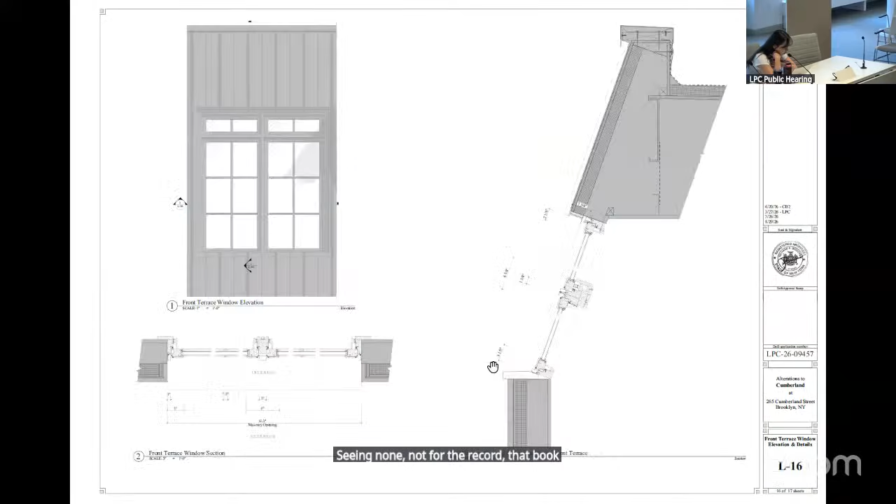Anyone else who wishes to speak, please use the raise hand function. Seeing none, I'll note for the record that Brooklyn Community Board 2 recommends approval on the condition the faux doors are reconfigured so the vertical lines don't conflict with the round arch, and that an excavation and access plan agreement is created with the neighboring properties.

Okay, thank you. Would you like to respond to any of the testimony? Well, first of all, I'm sorry you couldn't hear me, I didn't realize. And I think we struggled a little bit with where to put the trash enclosure, because there isn't room to put it on the left, which was kind of the logical place, as far as we could figure out. We'll take a look at it and see if we can find something better.

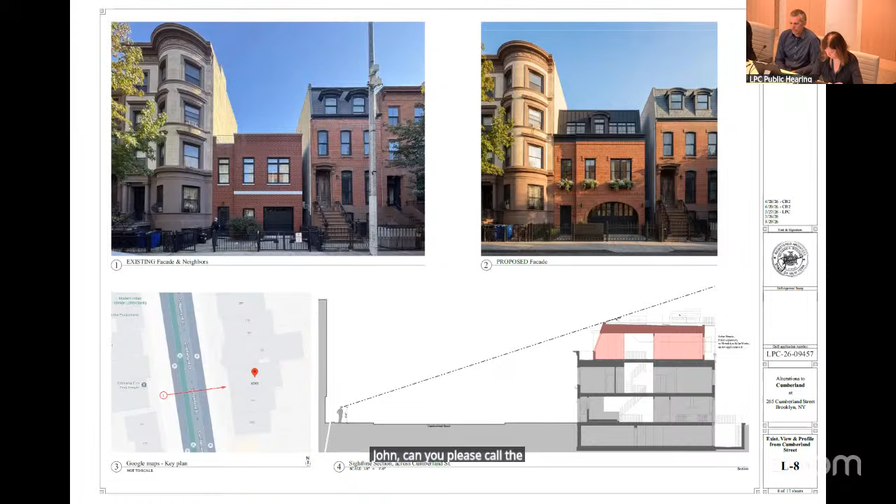Chair Dr. Savage, Aye. Vice Chair Master, Aye. Commissioner Chu, Aye. Commissioner Ginsburg, Aye. Commissioner Goldblum, Aye. Commissioner Quimby, Aye. Commissioner Jefferson, Aye. Commissioner Mahan, Aye. Eight in favor, none opposed.

The motion passes. Okay, that's been approved with those modifications. Please work with staff. And let's move to the next item.

Next item is public hearing item number 3, LPC 26-10263, an application for a certificate of appropriateness in the Borough of Brooklyn, Block 2111, Lot 7501. 1 Hanson Place, the Williamsburg Savings Bank, Hanson Place, individual and interior landmark, also in the Brooklyn Academy of Music Historic District. This is a neo-Romanesque style commercial skyscraper with a designated Romanesque revival style interior ground floor banking hall and basement space designed by Halsey, McCormick, and Helmer and built in 1927 to 29. The application is to install a mezzanine, built-in features and kiosks, and alter historic features within the designated interior spaces, and install exterior signage and HVAC louvers.

All right, good morning, Commissioners. Drew Hartley from Acheson Doyle. Great to see you. We're going to talk about 1 Hanson Place today.

We have lots of different sections. It's a very interesting building. Let me get started. Williamsburg Savings Bank Tower is a Romanesque revival building built in 1929 by Halsey, McCormick, and Helmer. Some interesting things about this building is that it is in a landmark district, it is an individual landmark, and today we're going to be talking about an interior landmark that's within the space. So it's very landmarked.

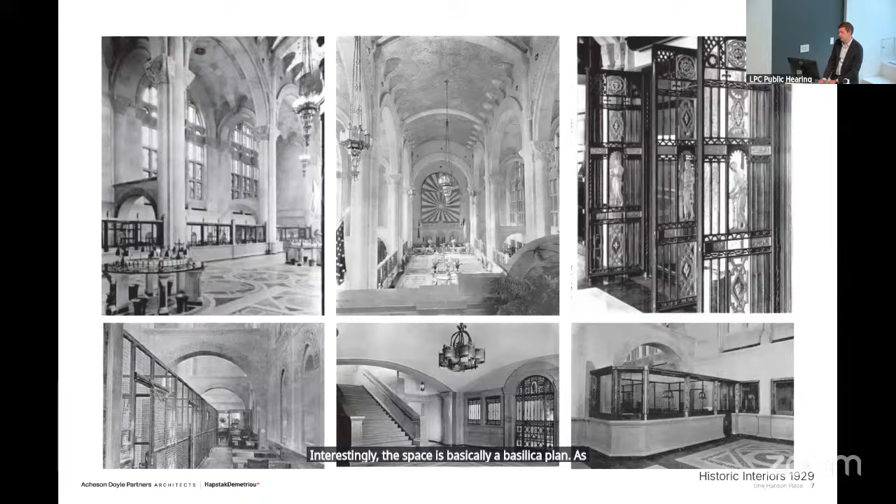Interestingly, the space is basically a basilica plan. It has a center aisle and two side aisles. This is looking from the mezzanine on the right-hand side, looking down the center aisle. There are arches connecting the columns to the exterior walls on either the right and left side aisles. The photo on the left-hand side is the mezzanine upstairs.

These are views of those side aisles. You'll see the right-hand view has a plain concrete floor. The left-hand view has a terrazzo floor, so it's one step down, but the center aisle really has the primary marble floor with lots of detail.

All right, proposed use. The operator that is proposed to use the space is a group called Casa Tua. They have two main businesses: a private club and restaurant business, which they opened a location for on the Upper East Side, and also a more mass market product, Casa Tua Cucina, which is what this location will be—a food hall. There are several different open cooking stations, and we'll show you how that works.

First, we wanted to look at bank halls in general and other interior designated spaces that the commission has reviewed. One common theme with bank halls is that they are designed to control access. There's usually a very small front door, and teller windows were designed to keep the money in and keep the people out. These constraints have always been a challenge for adaptive reuse.

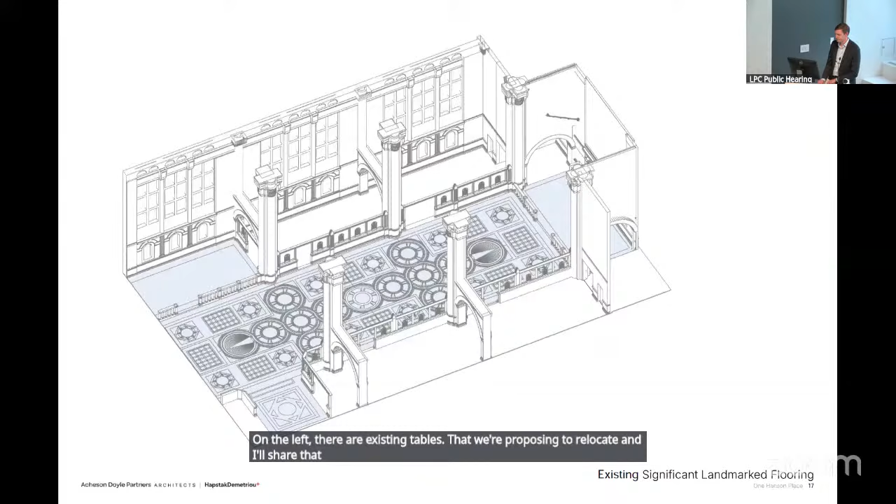Looking at a diagram of the space, we've highlighted the blue floor in the center aisle as the significant feature—decorative marble and a surface that is highly figured. That is where we're showing these bars. The two blue portions, top and low on the page: the top one is a terrazzo floor and the lower piece is a marble floor. So these are significant features that we're cognizant of.

The layout of the space is that there are three bars down the center aisle. There's a circular one as you enter the space, a larger bar in the middle, and a raw bar at the end.

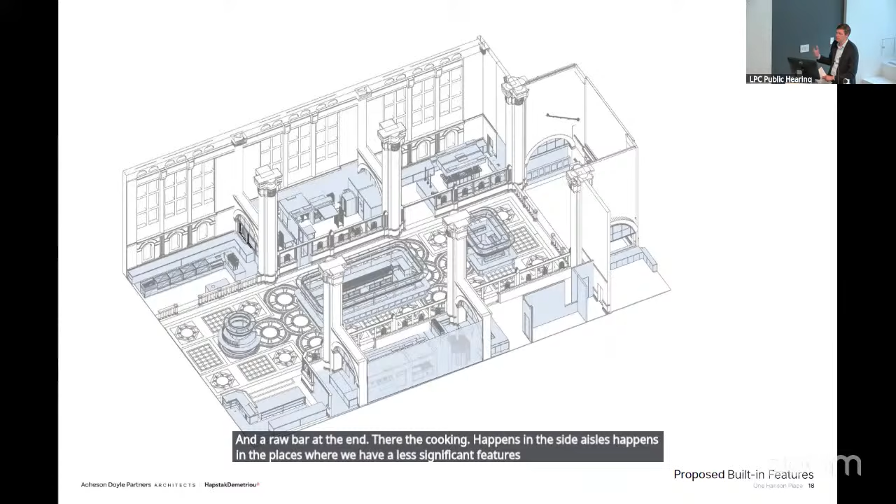The cooking happens in the side aisles, in the places where we have less significant features of floor, impacting space less. Right when you come in, there's a grab and go coffee pastry to the left, and a salad station to the right. Those are open spaces.

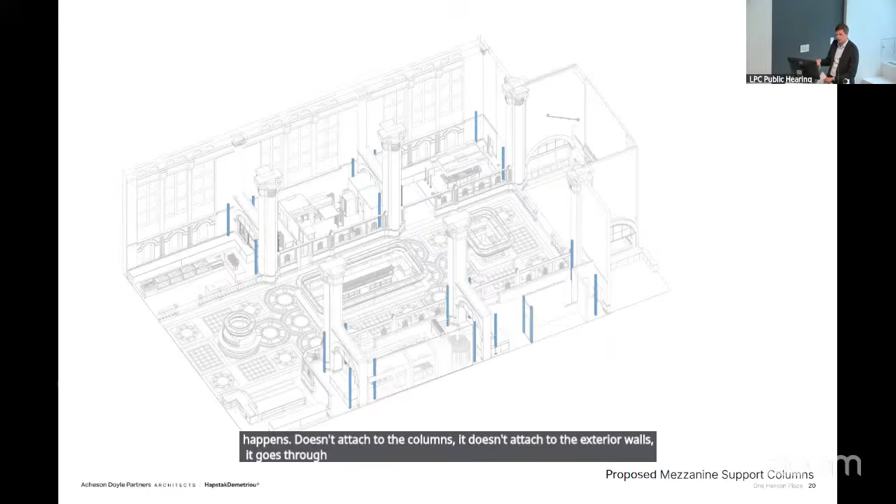Next, we are inserting a structural system that is completely independent of the interior landmark space. These are blue columns shown as a lightweight structure—a 6-inch steel column. It doesn't attach to the columns or the exterior walls. It goes through the floor and attaches to steel beneath the floor, so there's a penetration in the floor and then connections to steel below.

On top of those beams in that independent structural system, we're proposing a new mezzanine on the left and right hand aisles of this space. That mezzanine is not connected to the large stone columns, nor to the exterior walls. It is an independent structure that floats within the space.

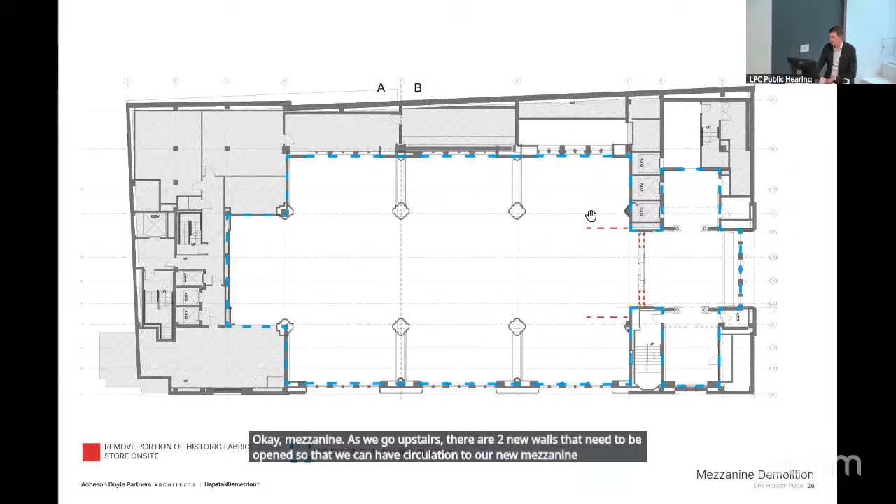So looking out into the space, it still presents itself as a basilica plan with a primary center aisle and secondary side aisles.

If you haven't been to the space, please come. It's fantastic.

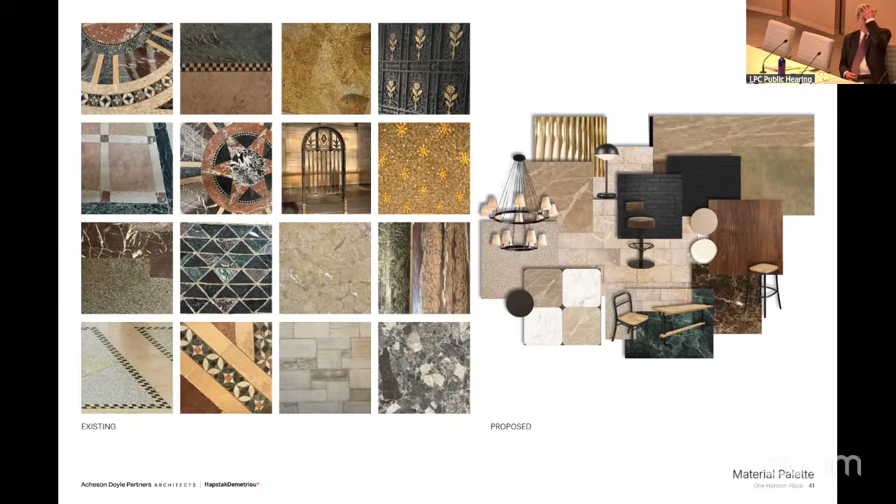Contributing features. The existing materials on the left and the proposed material palette on the right-hand side are very complementary. This space works very well for this use. So there's a lot of similarities in the materials.

The designation report calls out all of the significant features on the right-hand side, the light fixtures, a lot of the marbles. We went through all of these, and almost all of them are unchanged and are staying the same. Our approach is additive. These bars are being added to the space rather than removing a lot of this material.

Looking at the bars specifically in the center aisle, we looked carefully at penetrations to the floor. The bars have electric and water lines and floor drains. First, we prioritize trying to reuse existing penetrations in the floor; there are existing electrical penetrations we will be reusing. Second, we came up with a plan to group other utilities together so that we are targeting interventions that only displace one piece of stone or one medallion, which can be taken out and preserved. So we have a 4 penetration plan for those bars.

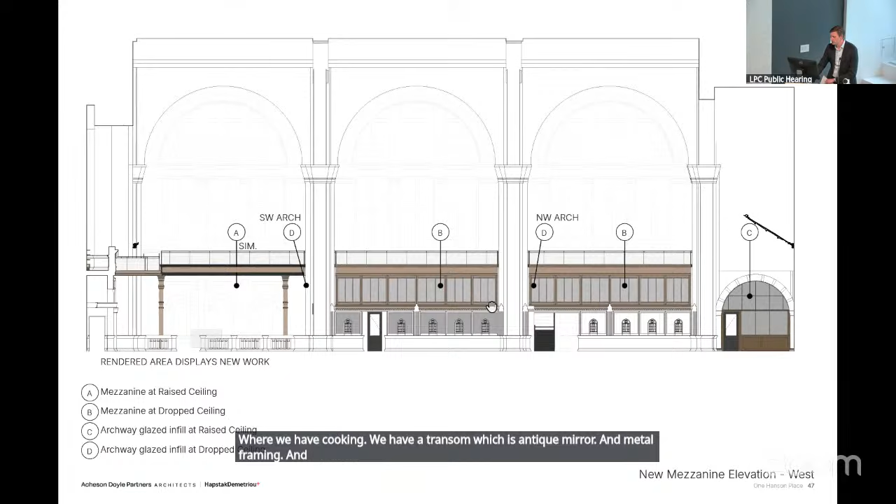We have a transom, which is antique mirror and metal framing, and this is a fully enclosed cooking area. So some have low ceilings and some have high ceilings, and I'll show you those details.

As we connect back to the existing mezzanine, there are 2 ramps that cantilever from the side structures and come around to the mezzanine on the left and the right. This is the mirrored opposite side.

So in section, that is a lowered ceiling at a cooking area. It has MEP space above for precipitators and ductwork to handle the exhaust. And this is the first run of a stair to get up to the mezzanine. So there is a location on both side aisles where there's stairs to these mezzanines.

We have a series of these, of the different conditions that occur. So this would be, has a transom in front of it and has a tall ceiling. We looked specifically at the historic teller windows and pushed back the transoms, pushed back 1 foot 1 behind those teller windows. So there's a clear separation in plane between the historic material and the new material. This carries up and then to the handrail above, but we made the intentional move to push that back.

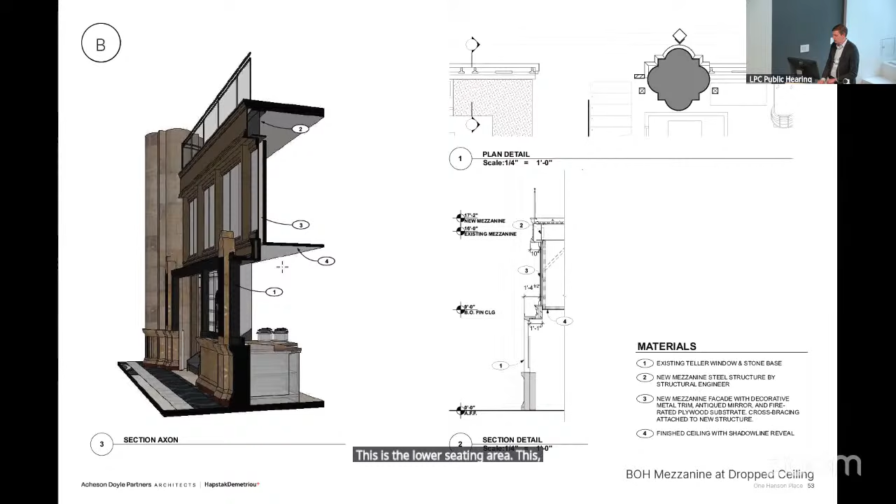As I previewed previously, these are details of the infills at the arches. You can see the proposed images on the right-hand side of infilling those arches. Some of these arches you can see from both sides. Others are concealed because they're in cooking areas. But the arches are visible throughout the proposed design.

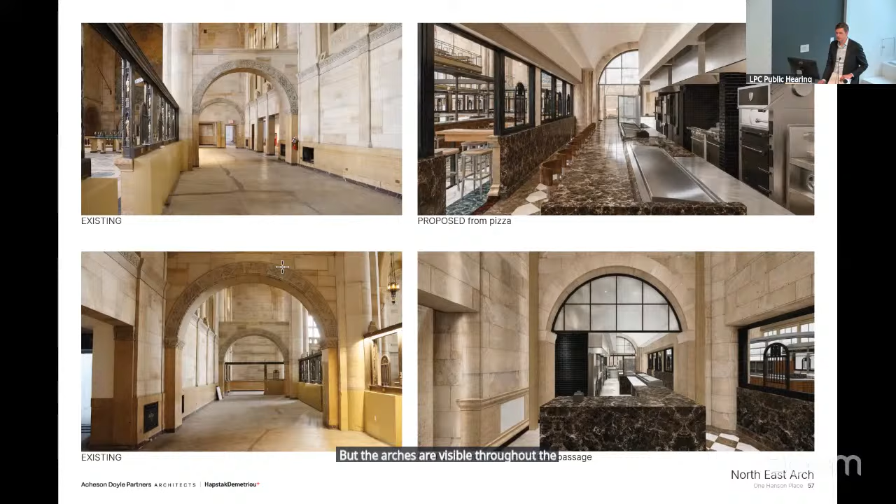So this is a glazed infill where we have a drop ceiling hiding, happens at the Grab and Go Coffee. And then inside the pastry, you can see the lowered ceiling.

Lower right-hand image here, this is the portion of the teller windows which we are removing. We're removing it for the stair to get to the mezzanine. Pulling that out.

So mezzanine is primarily seating. I will give you the overview and I'll show you that we have details for other conditions, but the intention

Here is that we are putting cement board down first, a slip sheet down first on top of the marble floors, then cement board, and building up a waterproof membrane on top of that so that each of the bars will have a self-contained waterproof floor to them. They're not going to be dropping glasses on the historic marble floors. They're going to be built up to protect those surfaces.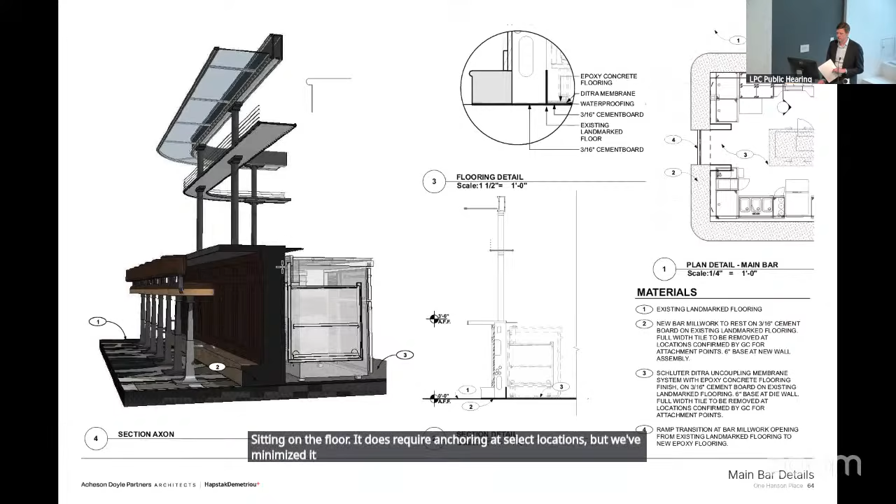The sushi bar has the same detailing. The one that I will call out is the podium. This is the first image that you saw. The podium will stay in place, and we're encapsulating that podium. We tried to use it, but the height of it doesn't really work for service. This proposal is to encapsulate it, keep it in place, protect it, but allow the correct seating dining height of a bar to occur there. So the historic material will stay in place and be.

Skip through some of these there, similar details. And then the approach to lighting is the existing light fixtures will be relamped and new lighting will be incorporated into them. There are non-historic light fixtures that will be removed. And the bars will have integrated lighting.

So just a final shot showing furniture in the space. A lot of the images we showed without furniture for clarity, but clearly there will be many people and lots of furniture in the space as well.

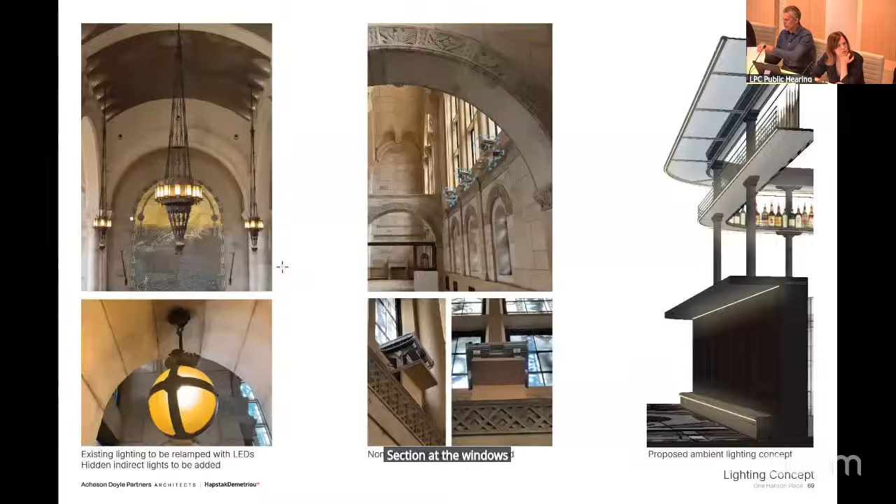Do you have a section at the windows? Mezzanine, where the mezzanine meets the windows?

I saw those, but it wasn't clear to me where the glass is and where the glass isn't. The glass starts about at that notch, but good point. On the other side, the glass is on one side and the other is blind side. So the intention is that the floor will not be visible from the exterior. That's correct. The windows are also, I mean, slightly frosted, if you could see.

Okay, about how much separation is there at that point between the edge of the floor assembly and the wall? From the flat surface of the wall, it's 8 inches, but at each of the windows it pushes in further, so we're probably a foot and a half.

Okay, thanks. Commissioner Jefferson? So I have two questions. One, the exhaust - how do you handle that? Does it go straight through the building, the tower, or does it? How do you get rid of the exhaust? The exhaust? Okay, yeah.

Let me - I don't know if I want to flip back and forth with all these. There's a lot of slides, but let me go to the diagram.

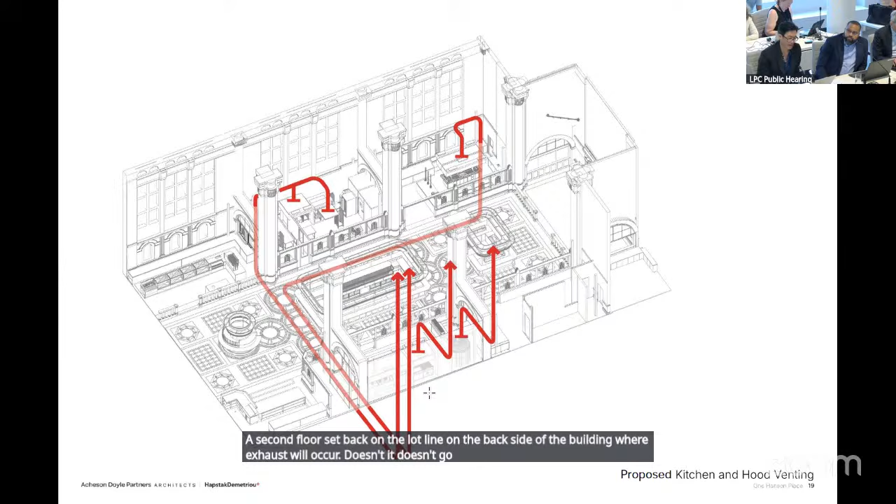And then there's a setback, a second floor setback on the lot line on the back side of the building where exhaust will occur. But it doesn't go up all the way up the tower, does it? It does not. It's done on the second floor. Okay, okay.

The second question - this is a food court. And every food court I go to, there's signage everywhere. I didn't see any signage in your perspectives. Are there signs?

What is this? I think that's a good question. The one difference between this and a lot of food halls is that they have multiple vendors in food halls, and this is all one operator. You come in the front door and you can sit down and order the pizza, or order the pasta, or order a salad, and they're coming from the different kind of display cooking areas. But it is not like a typical food hall where it's multiple vendors with multiple signage.

Well, thank you. Commissioner Ginsberg? So I have a number of questions. First, are the kitchens all electric? No, they are not all electric.

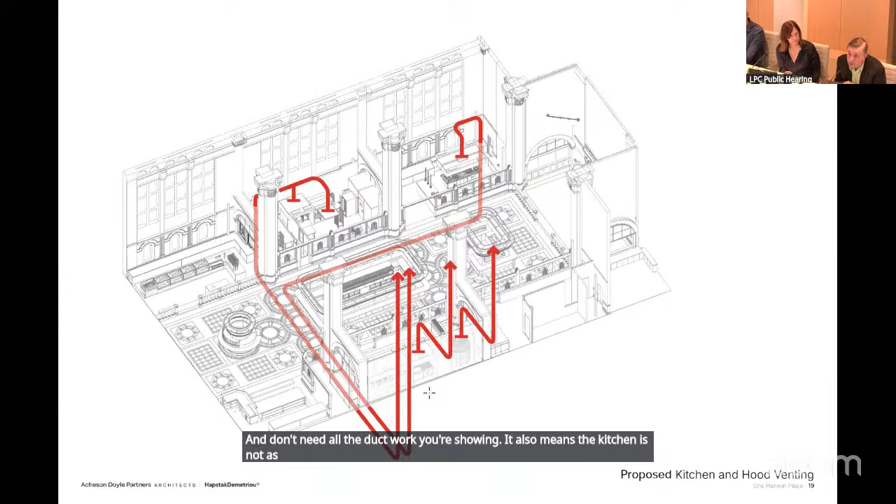Okay, I'm going to suggest you go back to the drawing board. I just saw the Hotel Marcel last week - it has fully electric kitchens. Besides certain energy advantages, it means they can use recirculating hoods and don't need all the ductwork you're showing. It also means the kitchen is not as hot, it never gets above about 80 degrees. And I think if you looked at doing all electric, you could solve a lot of the other problems you've had to do gymnastics to solve.

So that's question one. Question two, did you look at any part of the mezzanine floor being glass, particularly around the arches? We have looked at a glass floor structure in the past, but not as part of this iteration.

So I understand what you're saying is having a view to the arches below the floor. Question three, could the infill above the transoms above the teller windows have less framing and be more glass?

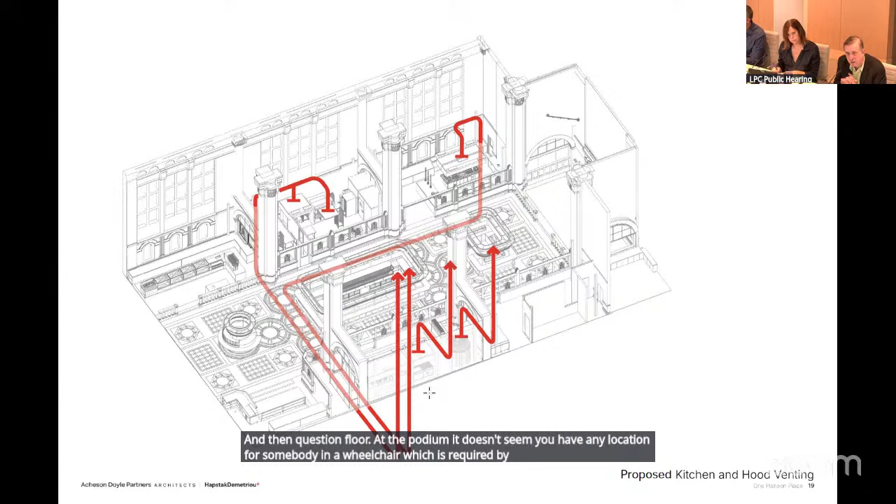And then question four, at the podium it doesn't seem you have any location for somebody in a wheelchair, which is required by ADA with the lower counter. Have you taken that into account, am I just missing that, or? Yeah, we do have it, we were just showing the front of it. There is a lower location.

Thank you. Okay, Commissioner Chu? Yeah, I've got - oh, he said they could look at that. We can look into it, yeah.

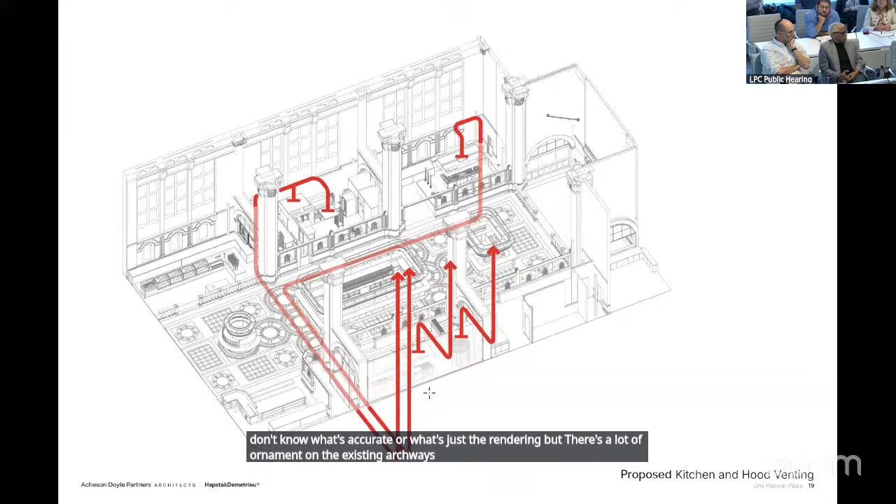It's only because you've got such a detailed set here that we can analyze - I'm grateful for that. About the existing fabric, there are renderings, and I don't know what's accurate or what's just the rendering, but there's a lot of ornament on the existing archways that are missing in the proposed. Does that mean you're getting rid of that? No, you just didn't put it in the render. Correct. Thank you. Okay.

The other thing is the teller stations have a lot of beautiful figures on the tops. Is that staying? Yeah, that's all staying, it's just not in the render. Okay, so that's all layered with the new upper transom setback from it. Yes, it'll all be set back. The existing remains and is restored.

Okay, can you go to a rendering that has that view of the teller station?

Oh, is that too far? I think... one that shows, that's good, that's good. Okay, so the details are all retained, just they're not in here. Correct.

I appreciate the handrail detail that pulls away from the column 3 inches, and floats, so it isolates the new mezzanine off of the historic fabric. In elevation, you don't need to show me now, but I just want to be ensured that the same level of detail has been taken where the transom intersects with the column as well. Correct. That's actually much more complicated than the handrail, as it goes around the back of the column. That creates a reveal so it doesn't crash into the stone.

Is the glass in the transom mirror, or does it change depending on what's behind it? Right now it's proposed as consistently mirror - an antique mirror in each location. So all that layer is antique mirror. Yes.

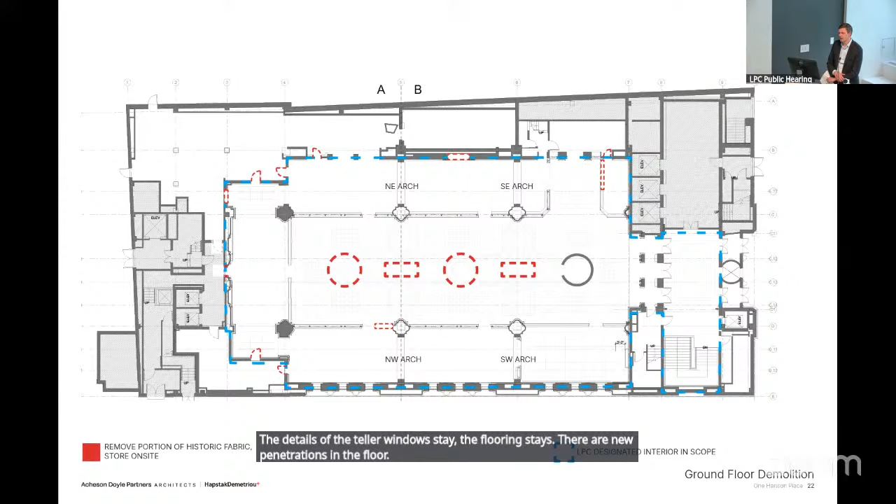There are new penetrations in the floor, so some of that material will likely be removed, but those would be kept as minimal as possible. Thank you.

Commissioner Jefferson: Conceptually speaking, if you go to your perspective, or anyone, on the mezzanine level - in terms of the relationship between the volume and the new addition, are you thinking in any way in contrast, or how are you thinking about the relationship between the new and the old? Is there anything that we should know?

Well, I think it was important for us to make sure that the existing historic teller windows are primary, forward of the transoms above. The detailing around the columns and this new structure not touching the walls is designed to look as if it is removable, gesturing to the fact that the historic structure is primary and our new structure is secondary. The third piece is that the mezzanines go in the side aisles. The center aisle has always been primary, and there were always teller windows on this division between the center aisle and side aisle, so we're using the same logic for where these structures go.

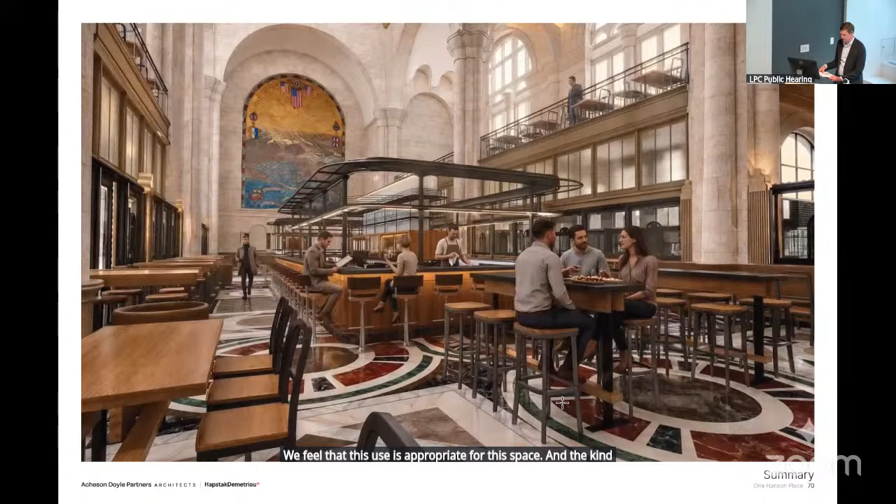The proposed use of this space is one that minimizes the interventions. There have been several other ideas for this space that would have been much more impactful on the space. Just the fact that we're only removing a portion of one of the teller windows and a knee wall, the demolitions and removal of historic material is minimal, and we feel that this use is appropriate for this space. And regarding the comment that another use might be better here, I just think this is the use that we have, and I think it is an appropriate use for this space.

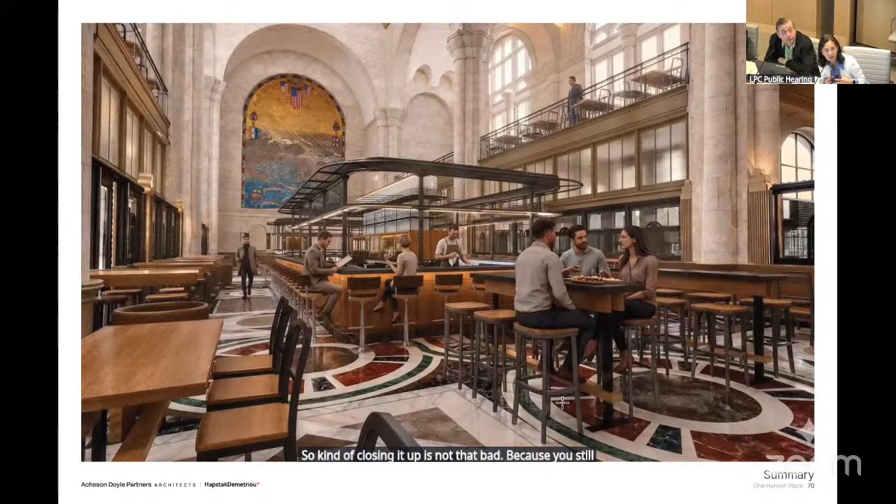You've used the teller space for the kitchen use, so closing it up is not that bad because you still get to experience the main entryway, the soaring ceilings, and the arches. I understand that for kitchen use you do need an enclosed space, and other than the electric versus gas issue, ventilation is extremely important. I think you've been fairly creative in ventilating the space, which is one of the prime difficulties in turning commercial space into restaurant use.

I'm glad that you're retaining and showing off a lot of the original flooring in the centerway, which is very nice. And I understand that adding the mezzanine level, which is reversible, is critical in terms of adding seating, which is also extremely important here to make this concept work.

I understand Commissioner Goldblum's reasoning in terms of lowering it. I'm actually fine with it as is, and the reason I say that is I think it aligns with the bottom of the windows. So I think that if you do lower it, you probably have some issues in terms of blocking it from the exterior and showing it. But I think that's something that you guys can work out.

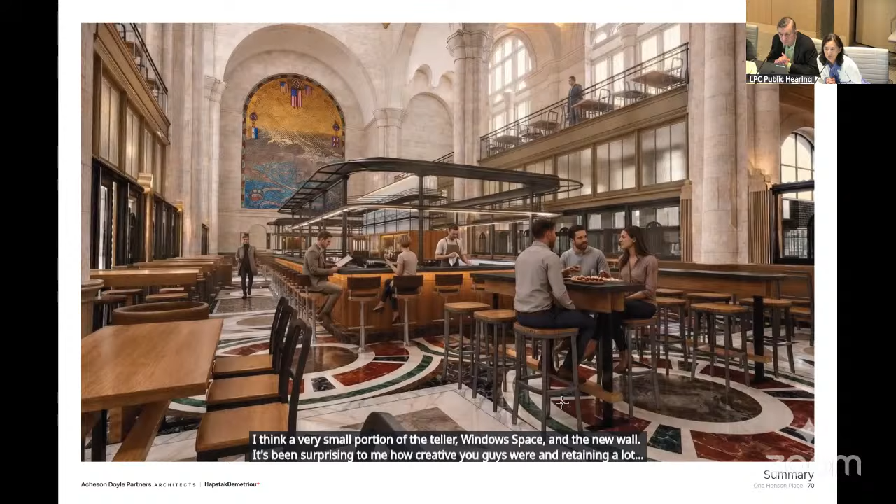I did ask the question about how much of it is reversible, and it sounds like, other than the floor penetration, you've basically retained a lot of the original elements—I think a very small portion of the teller window space and the knee wall. It's been surprising to me how creative you guys were in retaining a lot of the original architectural features.

And I appreciate how you've really gone out of your way to show and highlight the arches in any way that you can. And then in terms of the signage in the front, I think that's fine. It's very minimal—it's really where the signage currently exists. And I'm actually surprised that you didn't ask for more signage, given that the hall is quite large, and for food you typically do want more signage.

So overall, I would say this is a great adaptive reuse project. I really hope it goes forward because it's a great use of this space, and it's going to bring a lot of people in to see this beautiful individual interior landmark. So I can find it appropriate as presented.

Thank you. Commissioner Ginsberg: So first I want to say it's great to see a proposal for using the space, because as we've all said, it's hard to use. And this is a very thoughtful presentation. I'm not going to add everything, but a few main points.

I really want you to go back and look at an all-electric kitchen to reduce the mechanical, to reduce those ceilings, because I think it'll make a better project. Although, having looked at it and done all-electric industrial kitchens, the equipment is more expensive, but the mechanical is less, and the long-term operating cost is significantly less. If you have questions, the Hotel Marcel is a great example of this.

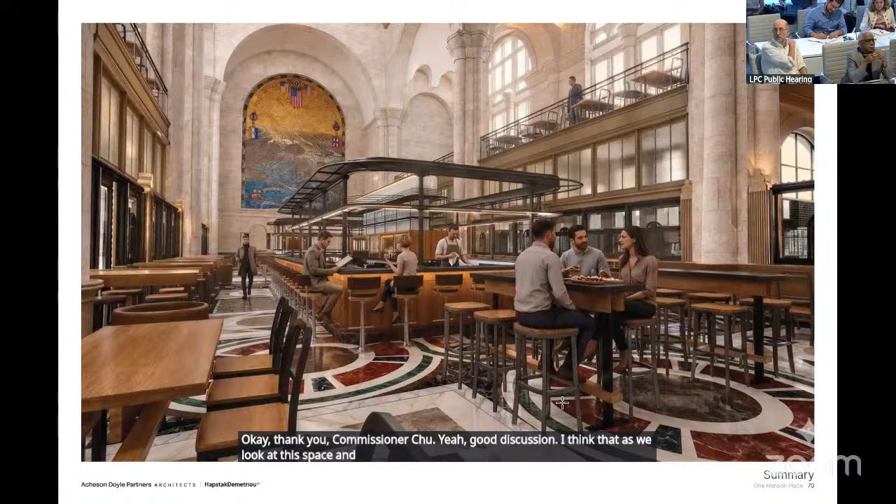Yeah, good discussion. I think that as we look at this space and appreciate why it is great, and it was designated, it is definitely the volume and the experience being in the hall, the two things that I think could be improved. And I do want to say, I really do appreciate the level of detail that has been put into this application. I do think that it gives us a lot more to understand and to make suggestions, but I think it has the potential to be a really, really nice project as a revitalization of an existing historic space that really hasn't had much use. The two issues in the proposal that I think could be

rethought or adjusted are: the first is Michael's comment about the mezzanine. I completely agree. I think that if you were to express the mezzanines less as if they were always there and attached to the structure, and let it float, I'm imagining they could feel more like bridges that were inserted into a historic building. Those buttresses have a structural aspect to them. They would literally sit on the buttresses and therefore create a relationship between what was added to the historic condition.

And I do think that pushing those mezzanines back to a line that was behind the columns would diminish the sense of mass in here, and what has become a little bit more of a canyon right now, a much more open visual space, and again help distinguish the historic condition from the new. I think that proportionally that also helps because it's a little equal right now, and if it got set back, increased the view to the exterior windows and reduced its sense of presence, it would be more of a terraced condition. I think that could be quite nice.

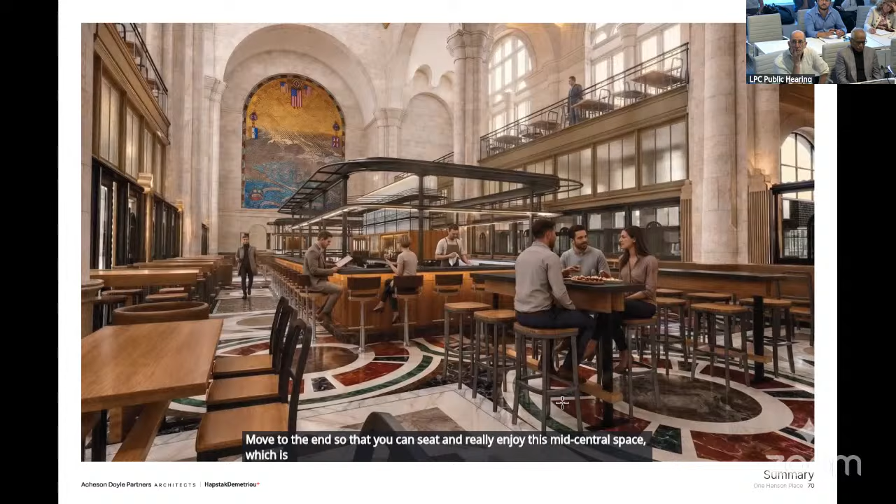I understand the approach. I'm not opposed to the design strategy in general, but I feel like these beautiful floors, a lot of it's being covered by the central island, and the place to gather right there is also being blocked by the island. So if that could be looked at, if there was a way to vacate the central portion of this volume again and not occupy it with such a large island, I think that would also help the experience. So those are my comments.